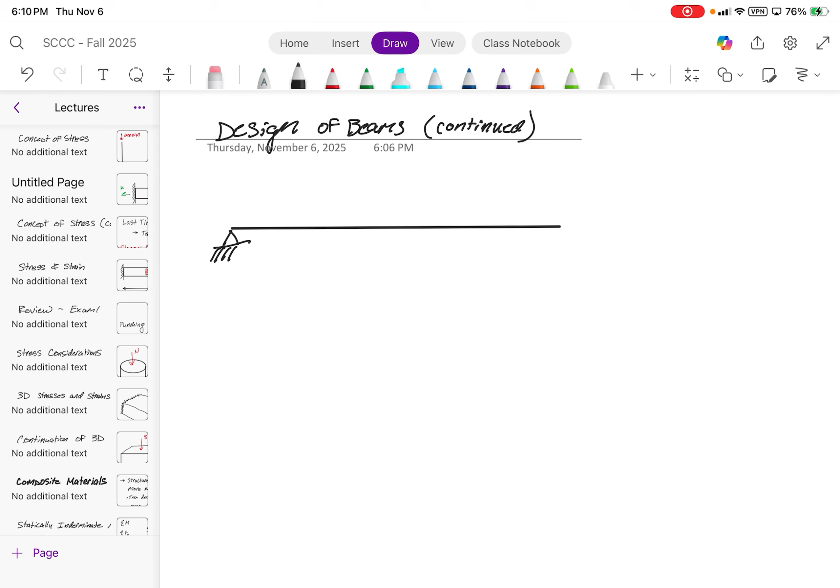All right, so we're just going to be doing more practice today of shear force and moment diagrams, and then also the design of beams, and then the analysis of beams.

So what I want to do is just give you guys a little sample here. Let's say that this is 3 feet and 8 feet. This is a - let's see, what's a good shape? A W8 by 58.

And so, A992 steel. So, using a factor of safety of 1.6 - no, 2.0, I want to use 2.

Determine if design is adequate. All right, so is it okay for flexure, because we haven't learned about shear yet, and I'll probably go into shear next class.

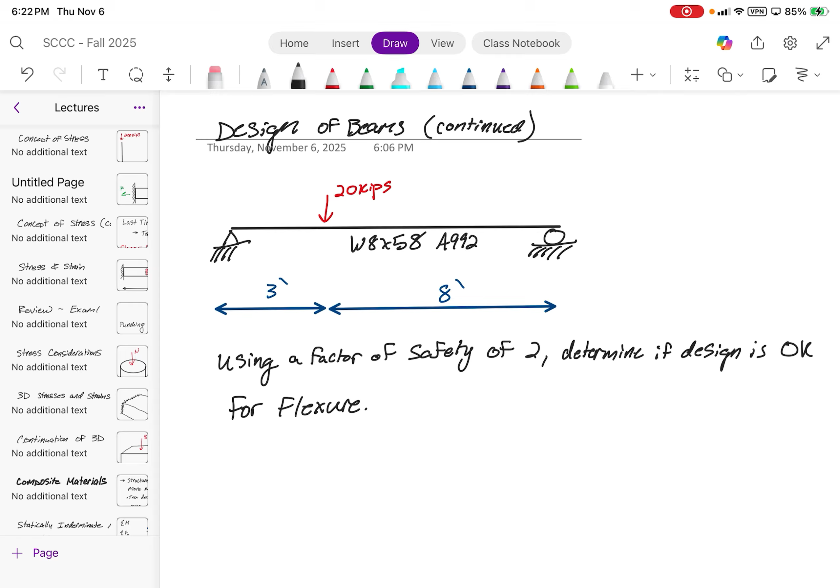What's your section modulus you're getting that you need? Here, let's work on it together. I was just messing around with some stuff on here, let me pull that back up real quick. All right, so...

Is the W shape adequate? I want to hear what you guys got. Still solving? Did you figure it out, you think you got it? I don't know if it's right, but I think yes. Edgar? Don't hope I got it. All right, Haza? No? Oh, this is bad. Your exam's in like 2 weeks, it's before Thanksgiving.

So let me ask you guys, what did you at least get for the bending moment? Did you draw it out? Shear force bending moment diagrams? Did you draw those out, or did you just use the equations from the tables? I don't know.

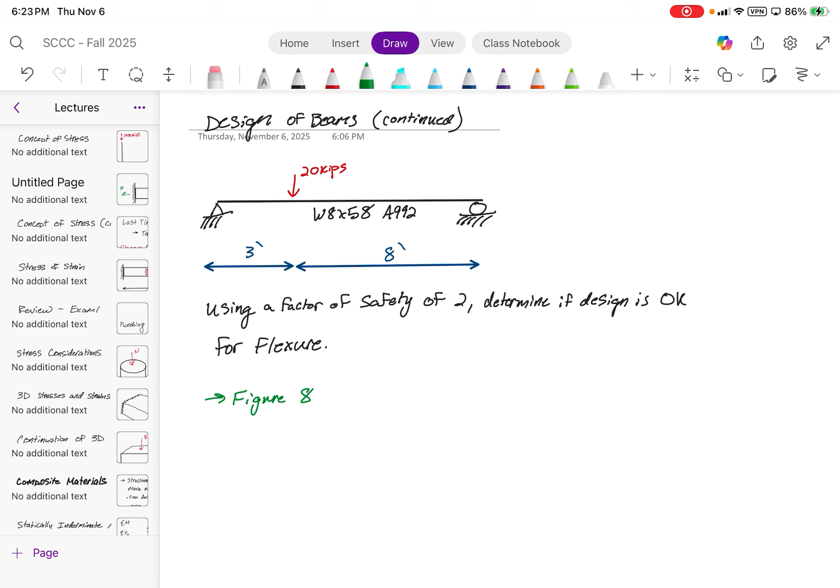Well, what you could have done is use Figure 8 here, because that gives you the bending moment for this load case. Within that table, A is going to equal 3 feet, B is going to equal 8 feet.

The length is just going to be 8 plus 3, so 11 feet. And so when you plug this in, you get M max is equal to the 20 kips times A times B divided by L, so 3 feet times 8 feet divided by 11 feet.

Now, what we should get for the bending moment is 43.64 kip feet. Is that what everyone got?

Now, we need to design our section for a factor of safety of 2. So what does that mean? Our design bending moment is just going to be M max times 2, so this gives us around 87.27 kip feet.

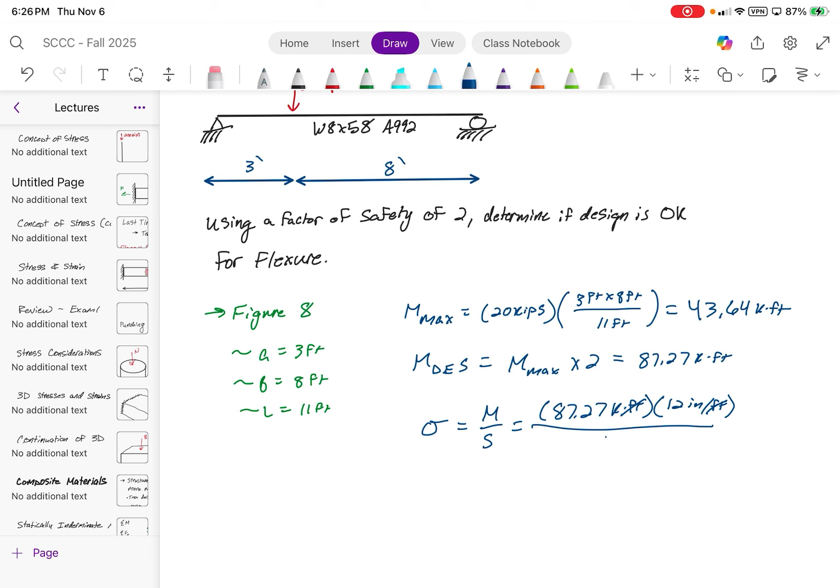And then what's the section modulus of a W8 by 58? Is it 52? Yes. Over 52 cubic inches, which gives us 20.14 KSI.

So is our design adequate? Well, what's the yield strength of steel, of A992 steel? It is 50 KSI. So because our applied stress is less than sigma y, what does that tell us? Good or bad? It's good, it passes. Great.

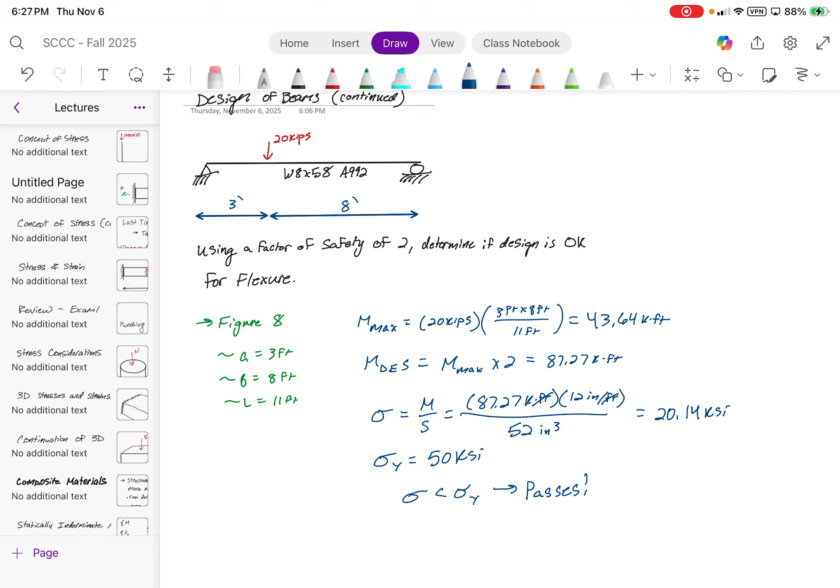Pretty straightforward, right? That's how you perform a design check. It's just really getting good at drawing these diagrams and using these tables, and then just remembering that equation, sigma is equal to M over S. Does that make sense to everyone?

Now, let's see, let's see here. Here we are. Now, there is one more topic that I really want to discuss in terms of beam flexure, and that is composite beams.

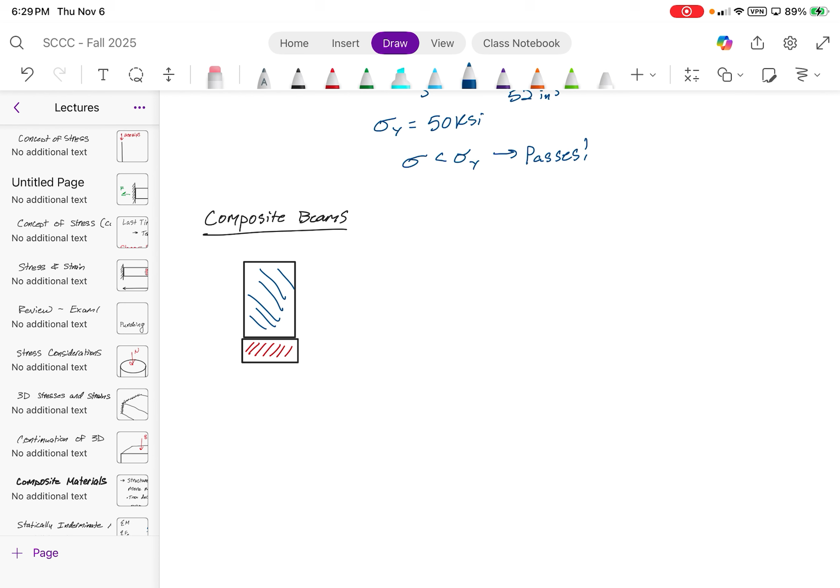Now, for composite beams, what do we know, what is a composite? Two or more materials, yeah. So this could be like a wood block with maybe some type of steel. So again, a composite is two or more materials.

Now, when we were learning about composites for axial loads, how did we relate the composite materials one to the other? They were both equal to one another? Well, that was compatibility, the strains are equal to each other. I'm not going to go into the derivation for that because it's kind of hectic.

I'm just going to show you guys an example problem for where that would be used. But what I do want to ask is, there was a material property we used to relate stiffness of one material to another. Do you guys remember Poisson's ratio? No, it's not Poisson's ratio. It's the modular ratio, the ratio of one material over another. You guys remember doing this?

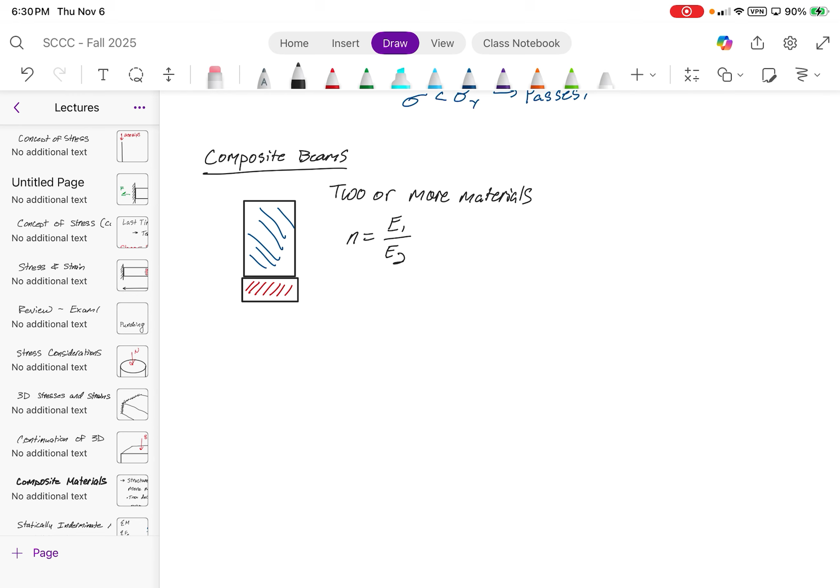Now, this becomes really important. So let's say that just for simplicity's sake, just to simplify the problem, let's give this problem some dimensions. Let's say that both of these elements are the same dimensions, right? I didn't exactly draw them as such, so let me fix that really quick. There. And let's assign 2 inches, 1 inch, and 4 inches.

Let's say this has an elastic modulus of around, I don't know, 1800 KSI. And then this had an elastic modulus of 29,000 KSI.

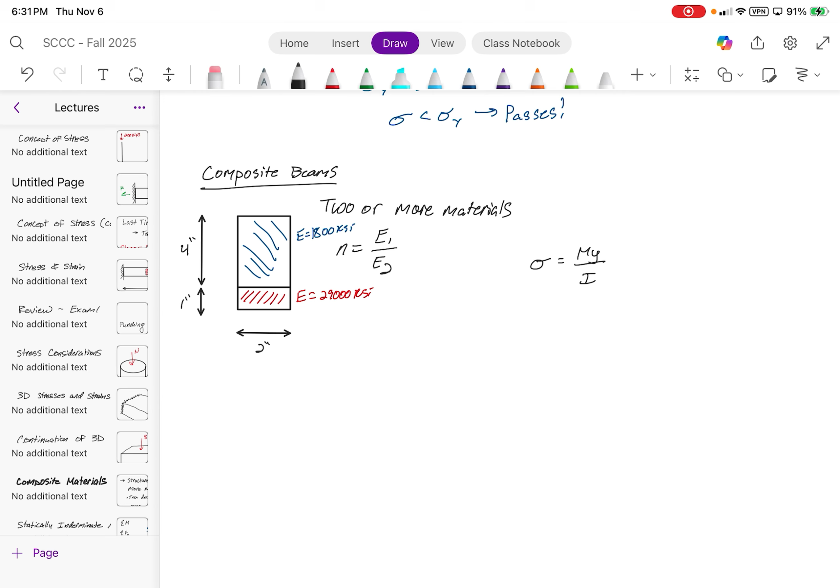So the way we would solve this is we still need to use our equation, sigma equals My over I. You need to use this equation because it's not symmetric. Remember, last class I said we can use the M over S equation for symmetric shapes only. Otherwise, you need to use My over I. This is one of those examples.

So what we need is I and Y. What is I? It's the second moment of area, or moment of inertia. So what you need to do is create that table, if you guys remember this.

That gives you the location of the neutral axis. And then you're going to have an IX, a dY, an A dY squared, and then an IX. Do you guys remember doing this in statics? You do? All right, that's good.

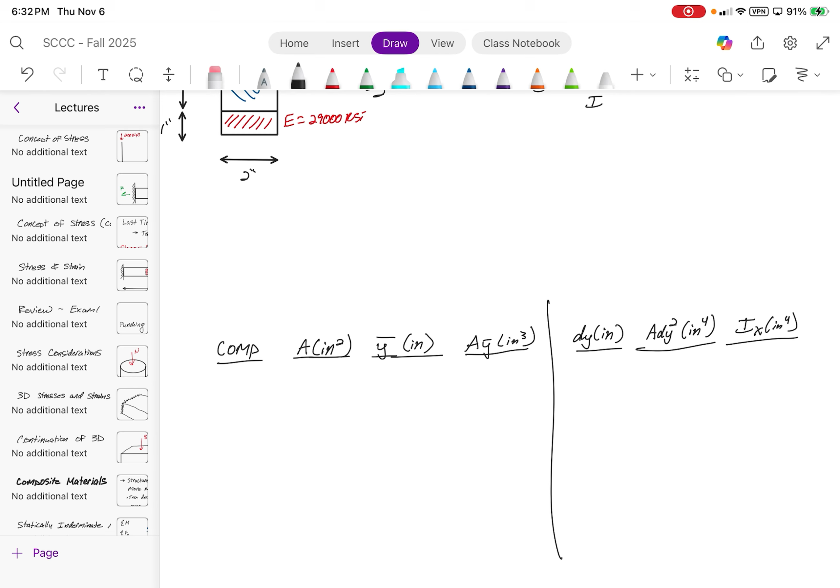Now, what are our two components? We're going to have component 1 and component 2, the blue and the red. However, one of the things that we need to do is make all of the materials, quote unquote, one equivalent material.

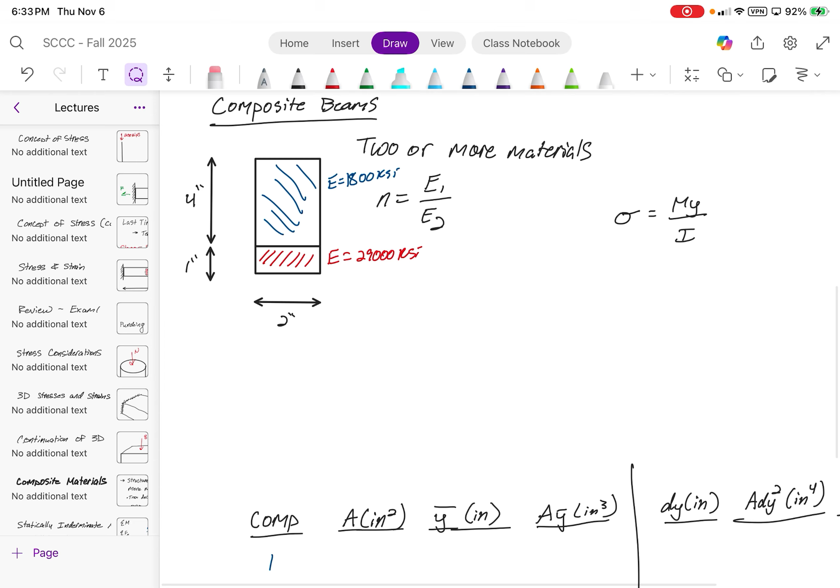The way that this is done is by taking our section here and finding a geometry that meets an equivalent stiffness. This can be done by simply transforming our stiff section into something more equivalent in geometry, such that it meets the same stiffness properties.

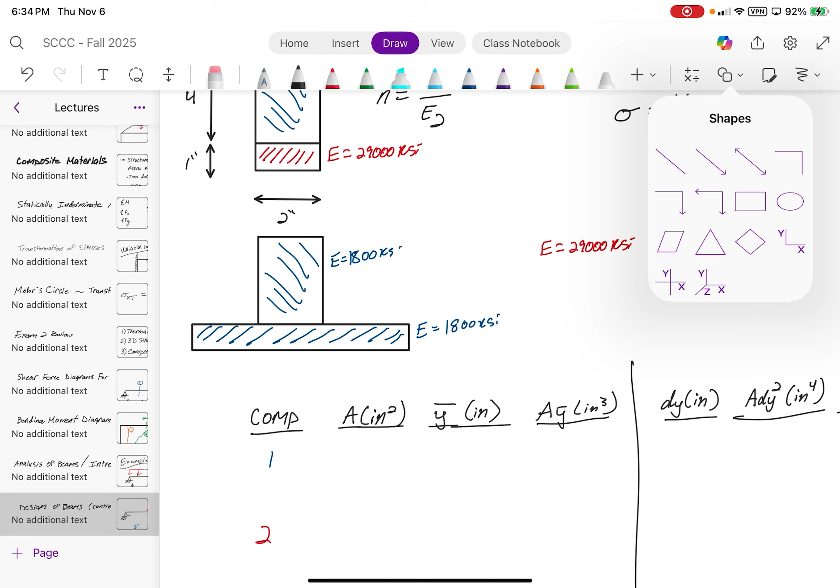What we can do is then change the width here, and this width that we change this geometry to is equal to that dimension that we initially had, which is just the 2 inches, and then we multiply it by this value n.

Now, in this case, E1 is going to equal 29,000 KSI, and E2 is going to equal 1,800 KSI. So 29,000 divided by 1,800 gives us a value of around 16.11, which means that this width is equal to 32.22 inches.

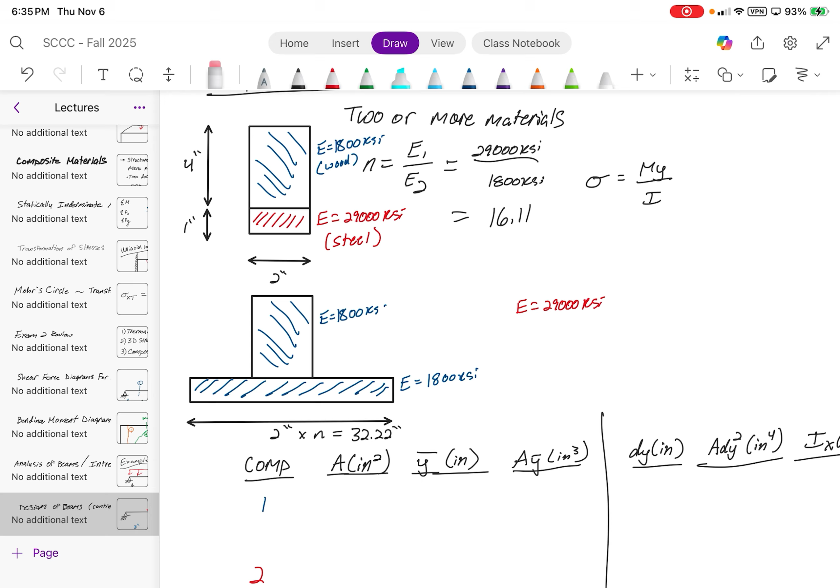It means that in order to meet the equivalency of this steel, you need about this much amount of whatever material it is - I think it's like wood, okay? Let's say it's wood. So the blue will say, whoops, I don't know why it just shot off like that, but this is wood, and then this is steel, and I'll actually clarify that down here.

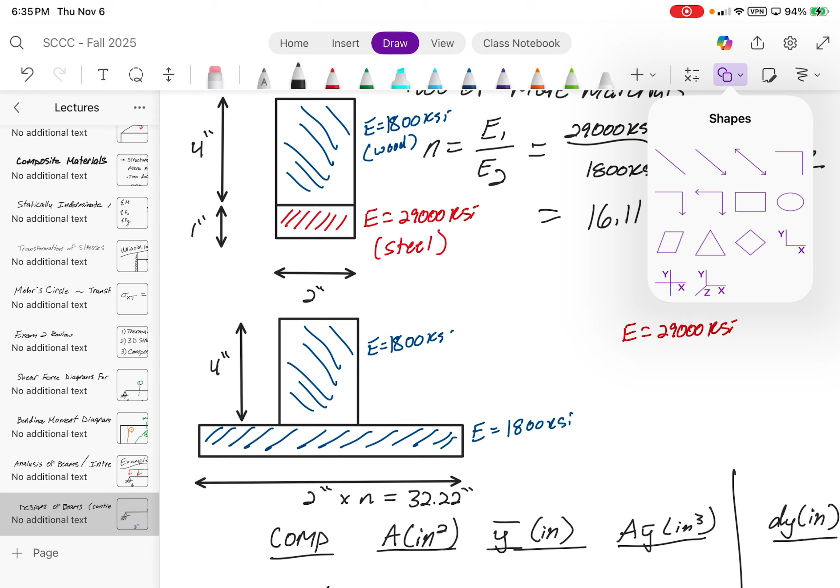So wood, and then steel, but we want to use the wood equivalent properties. Now, all we do from here is work this table using this updated geometry. And then the vertical dimensions here just remain constant, so that stays at 4 inches, and then this height stays at 1 inch.

Are there any questions so far about what's going on here? We're just relating one material stiffness to another and quote unquote transforming it, because the variation in the stiffnesses are going to cause variation in stresses. Does that make sense?

So the area of the wood for the top is just going to be 8 inches squared. And then for the steel equivalent for wood, it's just going to be 32.22 inches squared.

What we need now is the neutral axis locations. The neutral axis locations, if you guys remember, is just taken with respect to the bottom. So for the wood is going to be 1 plus 4 divided by 2, so 3 inches from the bottom. And then for the steel equivalent wood is going to be half an inch.

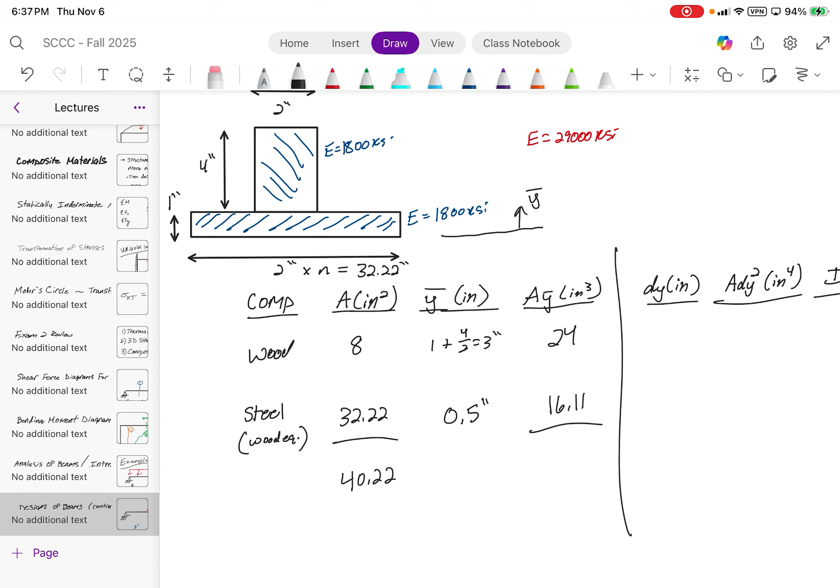Lastly, just multiply across, you get 24. And then 32.22 times 0.5 is 16.11. And so you just sum everything together. This becomes 40.22, and this becomes 40.11, which means that our y bar is equal to about - ironically, it's equal to roughly an inch. It's very close - it's like 0.998 inches, but I'm just going to say it's 1 inch.

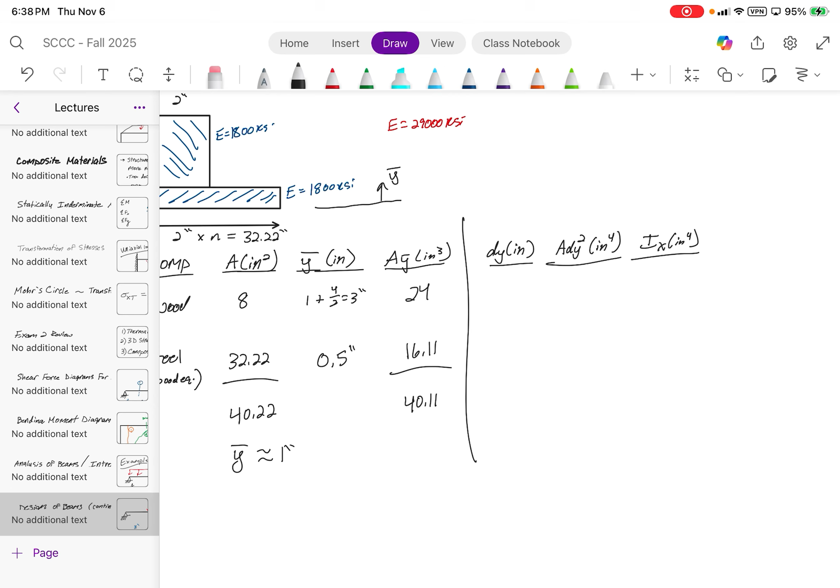From here, you do dY. dY is the distance from the neutral axis, which is just going to equal y bar minus y bar - we'll call this y bar t, so that's going to be this - and you're just taking an absolute value of it. So for the wood, it's just going to be 1 minus 3, so this becomes 2 inches. And then 0.5 minus 1 inch is just 0.5 inches.

32.22 times 0.5 squared gives us 8.06. And then 8 times 2 squared gives us 32 inches to the fourth.

And then Ix we calculate using the known value bh cubed over 12, which for the wood would be 2 times 4 cubed divided by 12, which gives us 10.67. And then 32.22 times 1 cubed divided by 12 gives us 2.69.

So this is 40.06, and then 10.67 plus 2.69 is 13.36, which means that our total second moment of area of inertia is equal to 53.42 inches to the fourth.

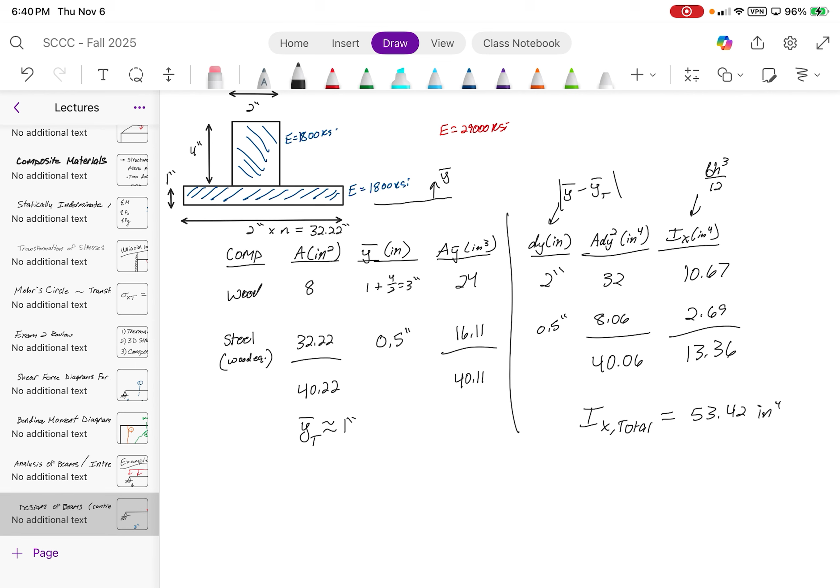We're not done with the problem yet. Let's say that this beam, we do our analysis, and we have a design force of M equal to, I don't know, 40 kip feet.

If we want to determine the stresses at the top and at the bottom, we need to use the My over I equation. So 40 kip feet is the load times 12 inches per foot to convert it from kip feet to kip inches.

Y is the location from the neutral axis. So let me grab this diagram again.

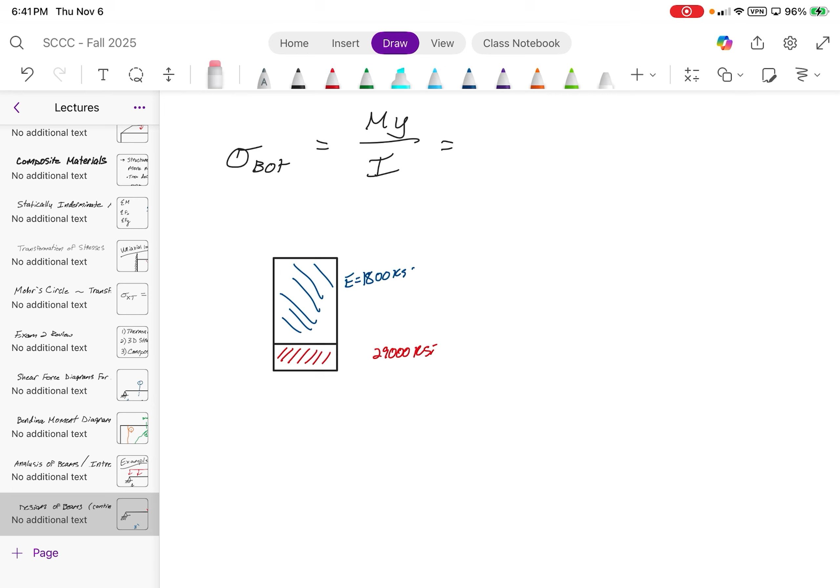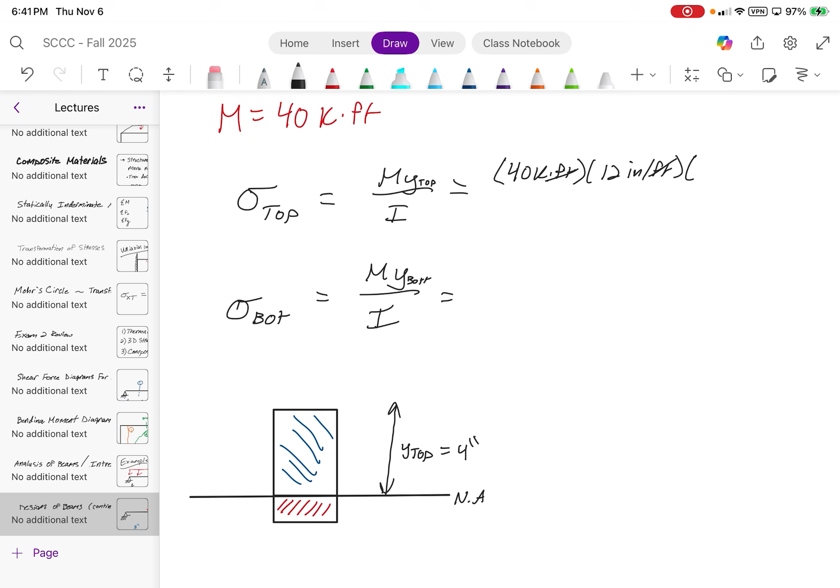So our neutral axis was roughly around here. Y bar to the top, that would be just this value, conveniently 4 inches. And then y bottom was equal to 1 inch. The neutral axis isn't always at the location of transition.

If, for example, you had two materials like this, you could technically have a neutral axis here, in which case this would be y bottom, and this here would be y top. But for this problem, it just happened that it's pretty close to the transition point, okay?

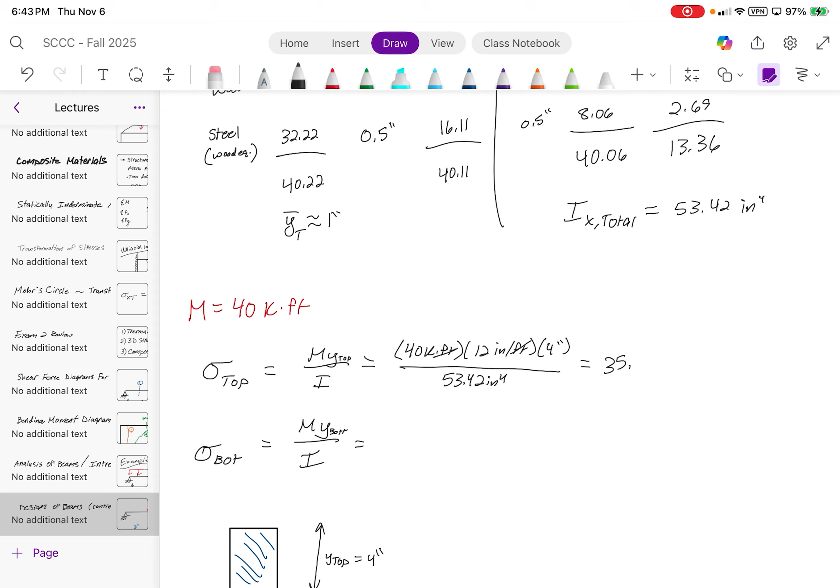So y top is equal to 4 inches. And then we just divide this whole thing by 53.42 inches to the fourth. And what we get is 35.94 KSI. For wood, this is a very high stress, so clearly you would want to redesign it.

Now for the steel, you do the same thing, but it's a different material. So for the transformed material, the steel, you need to multiply this stress by N.

This gives you a stress of around 144.75 KSI. I chose a really horrible bending moment for the checks, but you guys can kind of see what we have to do. Does this ring a bell to some people with the second moment areas of inertia and so on? Or not at all?

Okay, that's just how composites work. I might not give you a full-fledged problem on an exam. What I might do is ask you guys to find the equivalent transformed section, which then would be just this entire thing in one problem.

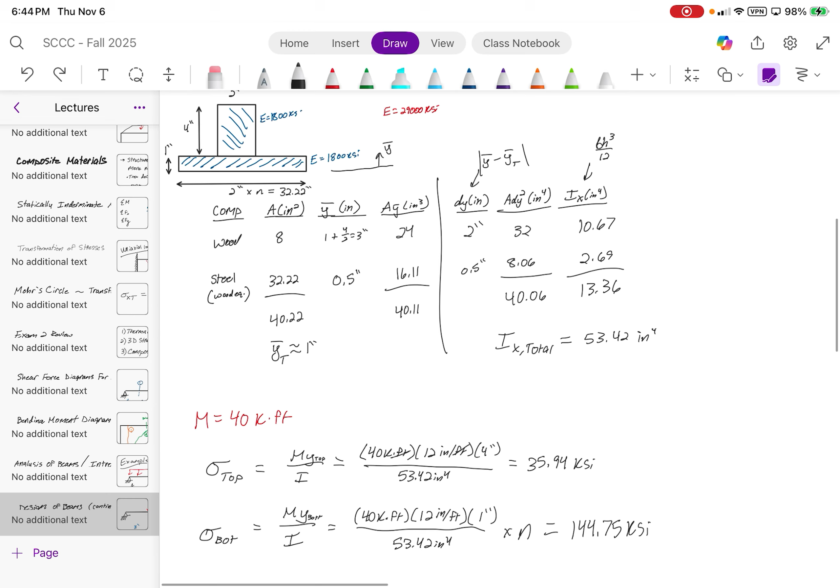Or I might give you guys the material properties, including the transformed section modulus with a cross section. So I'd give you IX and the location of the neutral axis, and I would just ask you guys to find the stresses. So it would be either this up here as one problem or this down here as one problem. But I won't give you guys both sections in one problem because it takes too long.

We just spent 15 minutes doing it. If that's on there, would you give us a table or should we write it down on a flashcard? I would recommend you guys write it on a flashcard. It's because you don't technically need a table to do this, but I would recommend you guys know how to write it.

I preferably don't put it on the flashcard, just remember how to do it. And actually, just as practice, I'm going to give you guys an example, and I want you guys to do this. Instead of it being a composite section, don't transform anything. This is all one material.

So this is 1 inch, 1 inch. This is 4 inches. And this is 4 inches. I want you guys to find the second moment area of inertia about the XX axis.

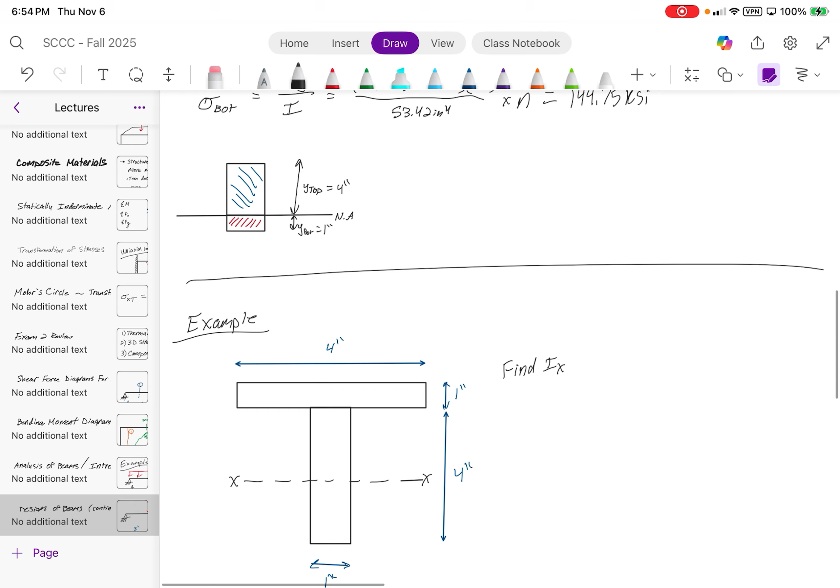Figured it out? Okay, all right. Somebody's got it, so let's go over it. Don't mind this, I'm just trying to plan for the next upcoming classes. Shake this around a bit.

All right, so what you do, you make your table: A, Y bar, A, Y bar. Your area is going to be in inches squared, inches, and inches cubed. And what you need is two components, your flange and your web.

What was the area of the flange? Which one is the flange for you? That's the top part, right? Yeah, the flange is always the top, the web is always the centerpiece. So the area for that would be 4 inches squared, and the same thing for the bottom.

All right, what about Y bar? 4.5 for one, 4.5 for the flange, and 2 for the web. And then a Y bar for each: 18 and 8. You sum these, you get 8 and 18, 26. So what did you get for your neutral axis location?

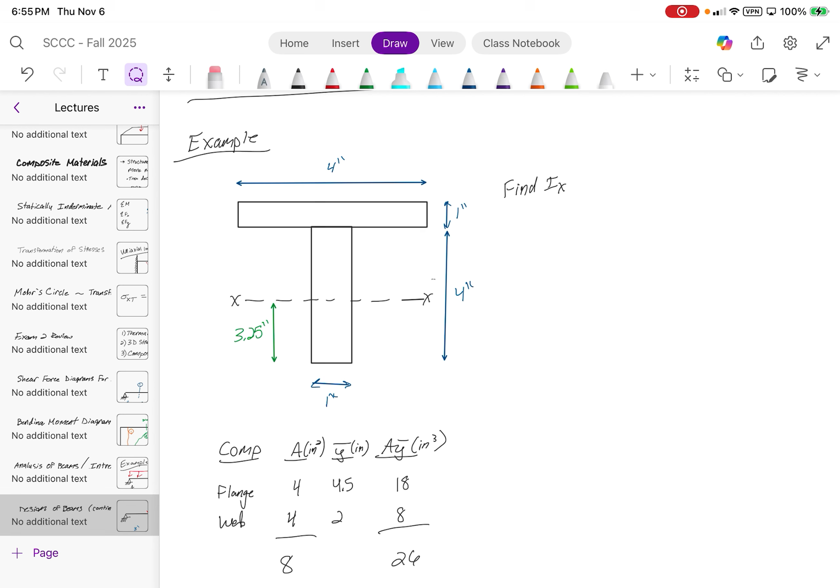3.25. All right, what that means is 3.25 inches from the bottom is our neutral axis. It probably looks closer to like something like this, I want to say. Maybe this. Whoops, I accidentally grabbed that on accident.

Good, now you've got dy in inches, a dy squared in inches to the fourth, and then Ix in inches to the fourth. What'd you get for dy for each of those? Or you didn't get up to it yet? Oh no, I did, I just messed up my Y bar.

I did 4 times 4, I meant to put 4 plus 4. It was just an easy fix though, so I think it should be 1.25 for the dy. I'm pretty sure it's for both of them. And so then 4 times 1.25 squared gives us 6.25 for both.

And then for the top flange, it's going to be 4 times 1 cubed divided by 12, so basically 0.33. And then 1 times 4 cubed divided by 12, which is going to be 5.33. You add these together, you get 12.5 and 5.67, which means that your total Ix, you should have gotten 18.17 inches to the fourth.

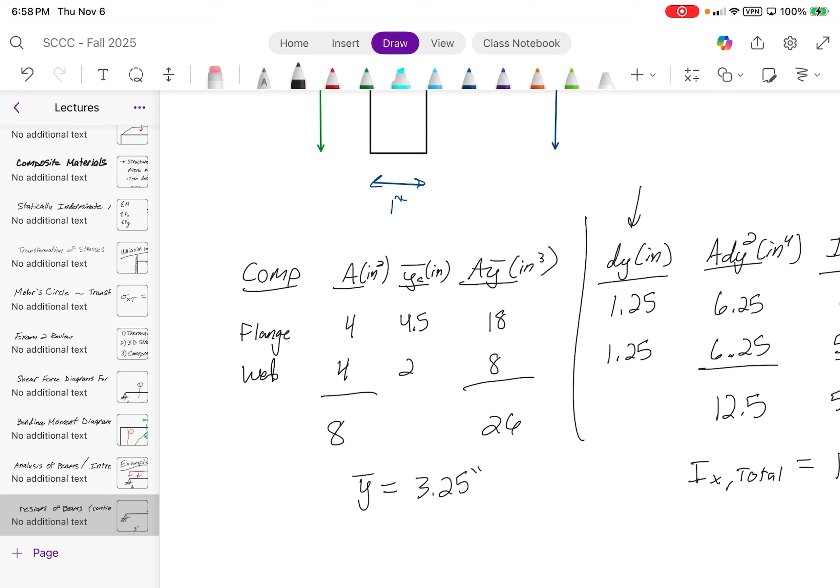Quick question, to get that Y bar, you divide 26 by 8, you get 3.25, and then once you have that, what the dy, dy, you can... I'm going to call this y subscript i representing each component, actually the y bar of each component, so yc. The dy is just going to be that y bar minus yc, but just take the absolute value because it ends up getting squared anyways, so it doesn't even matter the sign. Because you notice in dy squared, the square is going to cancel out the negative. Oh man, so just take the absolute value, it doesn't matter.

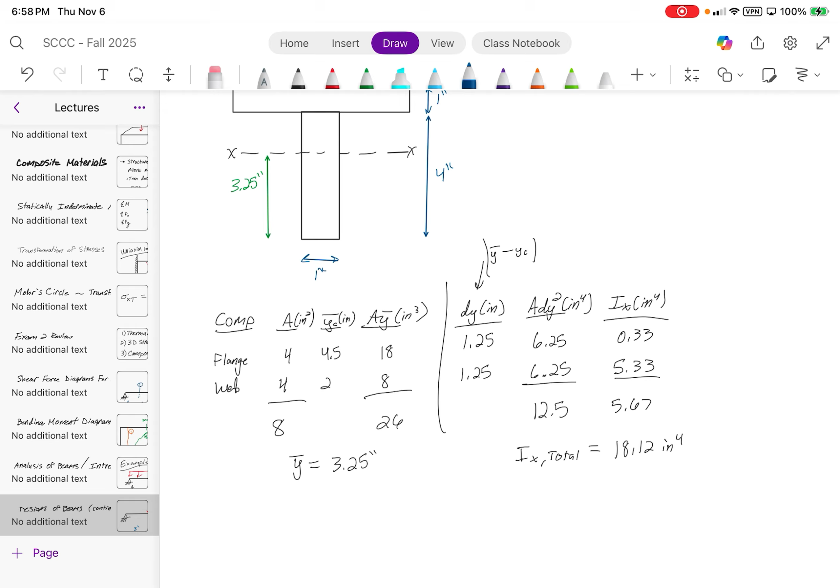All right, so you've got Ix total. Now let's say that you have a beam and you do your bending moment diagram, your analysis, and you get that your bending moment is equal to, let's say, 15 kip feet. What? Actually, nope, I'm going to change that.

Let's say that this steel is A36 steel. What's the yield strength of A36 steel? 36 KSI, all right. So knowing this, what is the maximum permissible bending moment that this section can handle? Take a few minutes to figure that out, and once you guys figure it out, we'll take our break. Or I'll go over it then, we'll take our break.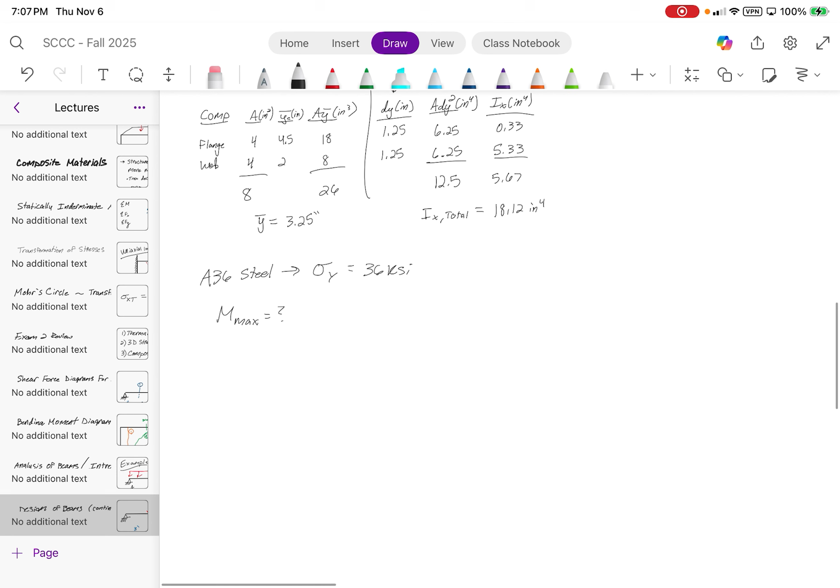All right, let's unfreeze this. I gotta shake my screen just to turn it back on. All right, so...

M max is equal to question mark. How do we do this? We gotta recall our equation for stress, however we write it in terms of sigma equals My over I. Now, because we don't have a singular section modulus, you keep the equation in this form.

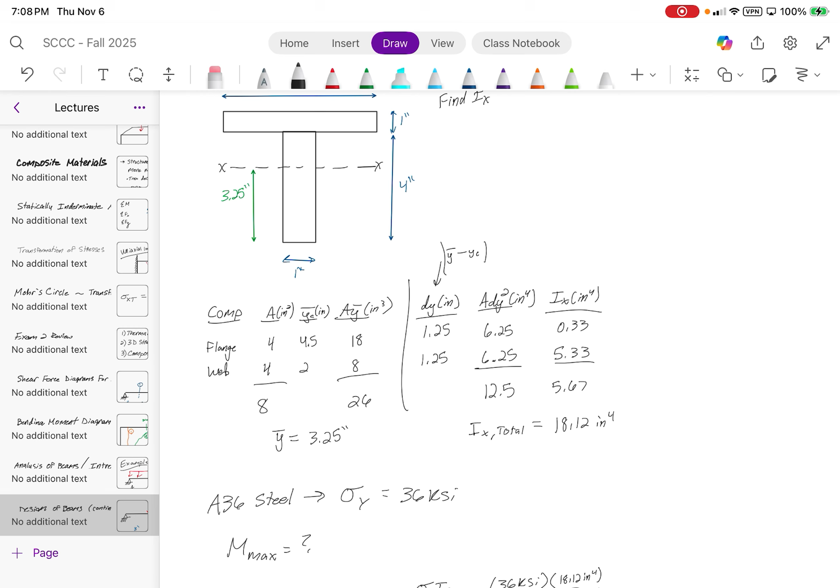So from here, you plug in 36 KSI times I, which is 18.12 inches to the fourth. But then the trick becomes, what do you use for y? I used the 1 inch for the replacement. Well, it wouldn't be 1 inch.

So there are two possibilities we can have for y. We can have y top, which what is that going to equal? And then we can have y bottom, which is equal to that. Can somebody tell me what those are equal to? Is that y bar? Well, y bottom is y bar, yeah, so 3.25 inches, which means y top is going to be 5 minus that.

So 1.75 inches. So to find the maximum capacity that this section can handle, which value would you guys use, 3.25 inches or 1.75 inches? 3.25, why? Because it's the furthest away. It is, you would use...

3.25 inches. The reason for that is because when you are drawing your stress-strain curves, your stresses will look kind of like this, which means the bottom is going to yield first. Otherwise, what happens is if you set the top equal to yielding, your stress diagram ends up looking closer to something like this. Which is incorrect. The reason being is because all of this also ends up yielding.

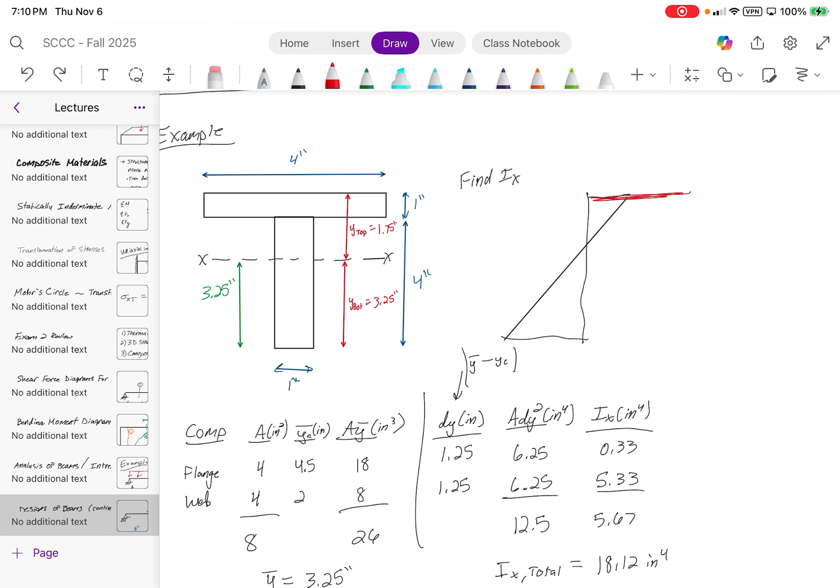Do we want that? Depends on the material, but generally no. For steel, you would assume full yielding. I'm not going to get into that at all because that's an entire nightmare in itself. Well, not that it's a nightmare, but I'm trying to keep things related to this class. So because of that, the y should be chosen such that it creates the minimum value.

So by using this larger value, it's going to reduce the maximum capacity of the bending moment. So yeah, you're right, Oscar, for that reason alone that it's further away. So 36 times 18.12 divided by 3.25 means the maximum bending moment we can have is 200.71 kip inches, which when you divide by 12, you get 16.73 kip feet.

Which means that no matter what type of load you have applied for that beam, it cannot exceed a bending moment of 16.73 kip feet. Any questions? No? All right, let's reconvene in about another 5 minutes, and then I'm going to go into shear stress, just to show you guys how that works.

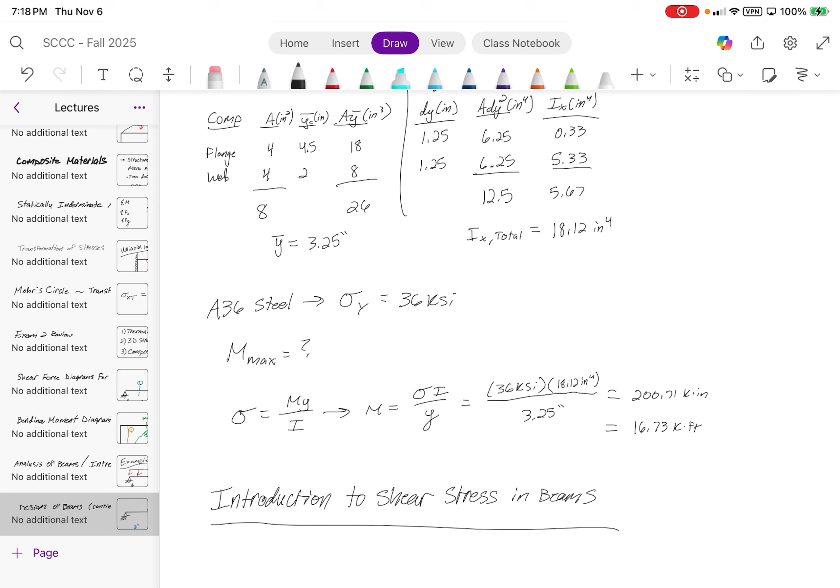All right, so introduction to shear stresses. Shear stresses are another type of stress that you need to consider in the design of your beams.

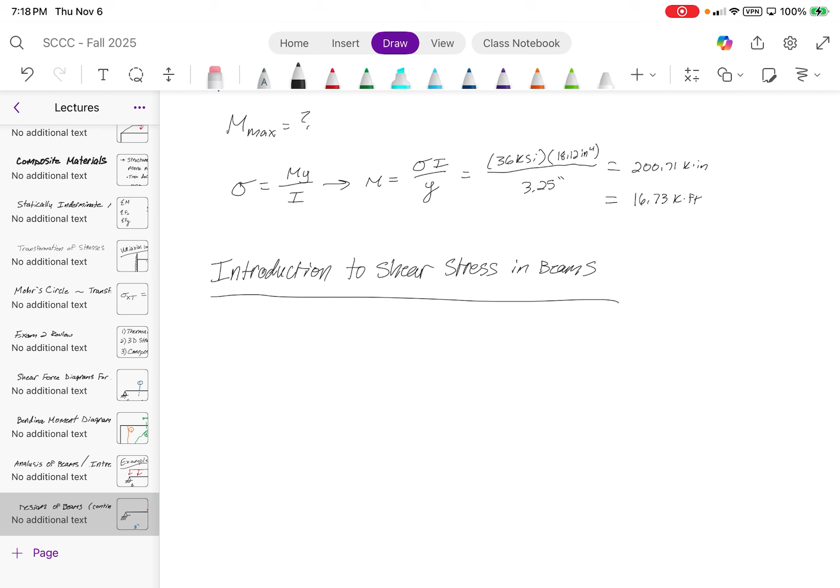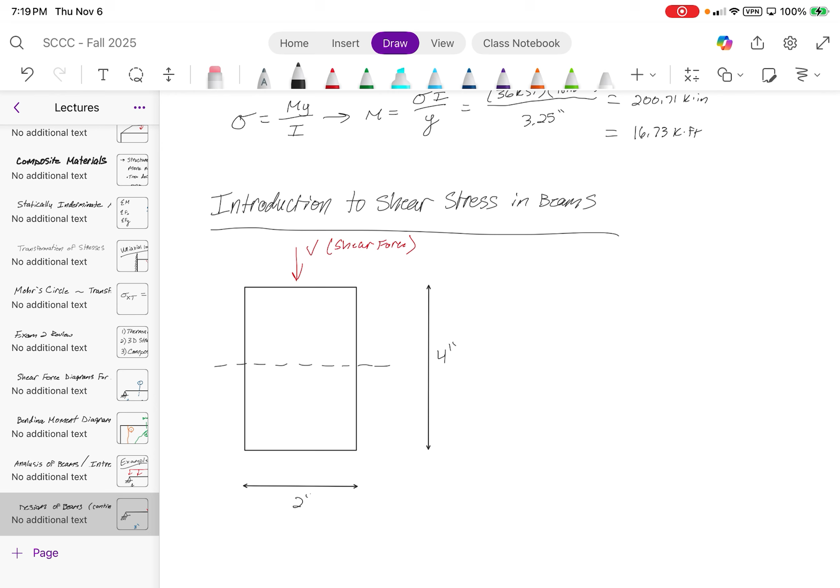Let's consider a rectangular cross section subjected to some type of shear force, V. So that's our shear force. And let's say that this has dimensions of 4 inches and 2 inches.

Now, if this shear force was equal to, let's say, 5 kips, what would be the conventional way of calculating stress in a beam for shear, for anything, not necessarily a beam? What do you guys remember about our shear stress equation from the beginning of semester? V over A. Exactly, V over A.

So 5 kips divided by 4 times 2, which would be 8 inches squared, which would just be 0.63 KSI.

However, in reality, a lot of times when we are designing with shear in beams, we need to consider that there's actually some variation within the cross-section of the beam's shear.

So how will this look? This shear force is actually going to be quadratic, where it's maximum at the neutral axis.

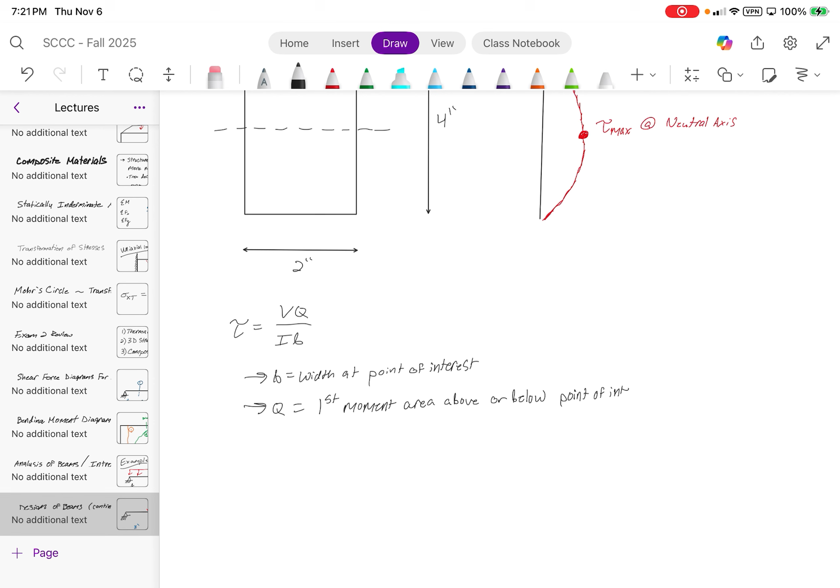So what do we mean by this? What is this Q value? Well, when we develop this, Q is equal to these new terms called A tilde times Y tilde, which are the area above or below the point of interest and its location with respect to the neutral axis.

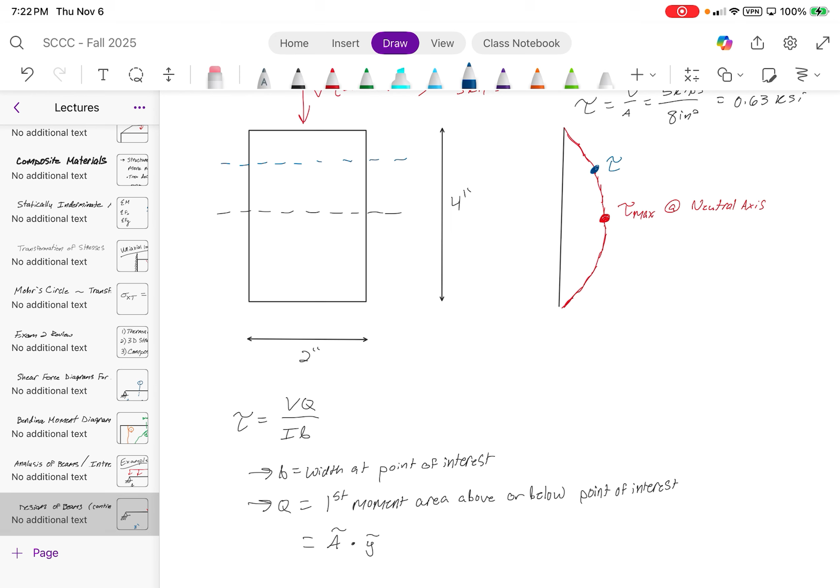So let's say that we wanted to find the shear stress here, tau. That's where our point of interest is. Let me not stop recording on accident, go back to this. I'm just going to call it tau I. Tau I is our shear stress at the point of interest.

This A tilde is going to equal the area above the point of interest. What is Y tilde? Y tilde is the location of the center of this area with respect to the neutral axis.

This is basically the same as if you did the components, you have the A, and then you've got the Y, and then the AY bar. The Q is basically just this value, right? You're just doing it for a very particular location.

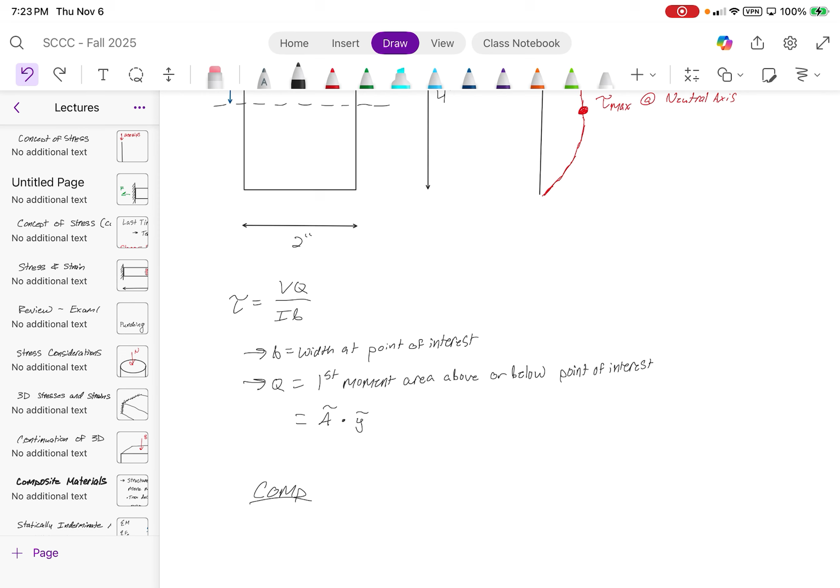So let's say that we were interested in the shear stress at a distance, I don't know, Y, 2 inches away from the neutral axis. All right?

So what we would need to do is, we know what our shear force is. We said our shear force was 5 kips. What is the width of the section at this location here? Yeah, it's just 2 inches.

It gets a little more complicated once you start having like W shapes, because then the width varies. But the equation would just follow the same exact procedure. It's just a matter of understanding that width B. That's the trick with these problems. So you have B, which is equal to 2 inches in this case.

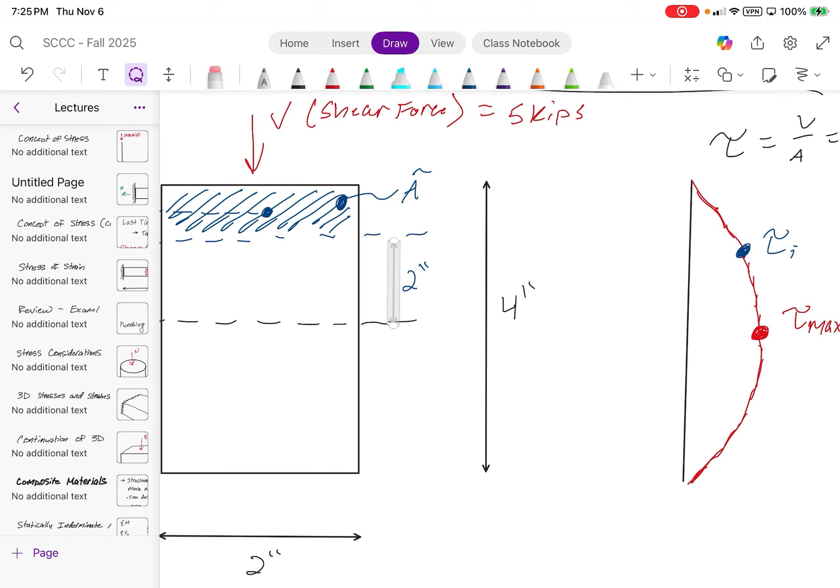But then what is the area, this A tilde here? What would that be equal to? First we need to know where this neutral axis is.

Oh, well, I just realized this doesn't geometrically work. Let's make that 6 inches, so just change that from 4 to 6. That way this is located 3 inches away, which in turn would make this equal to 12 inches squared, which 5 divided by 12 is just 0.42.

Sorry about that. So, what is the area above this location here? Well, what we need firstly is the height. The height of this location is going to equal what? Do you know? 1 inch.

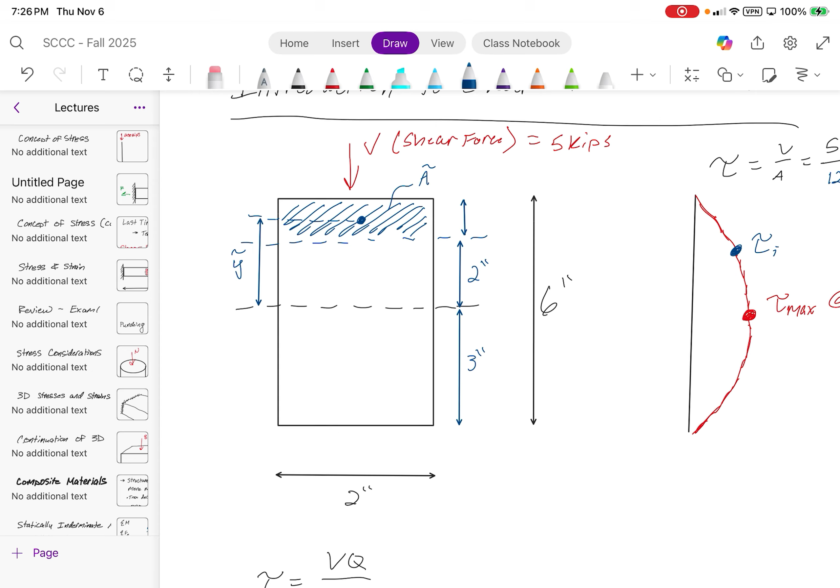So the total area, A tilde in this case, would be what? 1 inch times 2 inches, right? So it's 2 square inches. Now, where's the location of the center of that area?

It's just 2.5 inches. Does everyone see how it's 2.5 inches? You go 2 inches up, and then it's halfway up the 1 inch dimension, so 2.5 inches. Which means that our first moment of area is going to be 2 times 2.5, which is just 5 inches cubed.

Now, we need I, which is just going to equal B times H cubed over 12. So we've got 2 times 6 cubed over 12, which gives us 36 inches to the 4th.

So now we have everything we need. We just throw in our shear stress. We get tau, not tau max, but tau at this location is going to equal 5 kips times 5 cubic inches divided by 36 inches to the 4th, divided by 2 inches, which gives us 0.347 KSI.

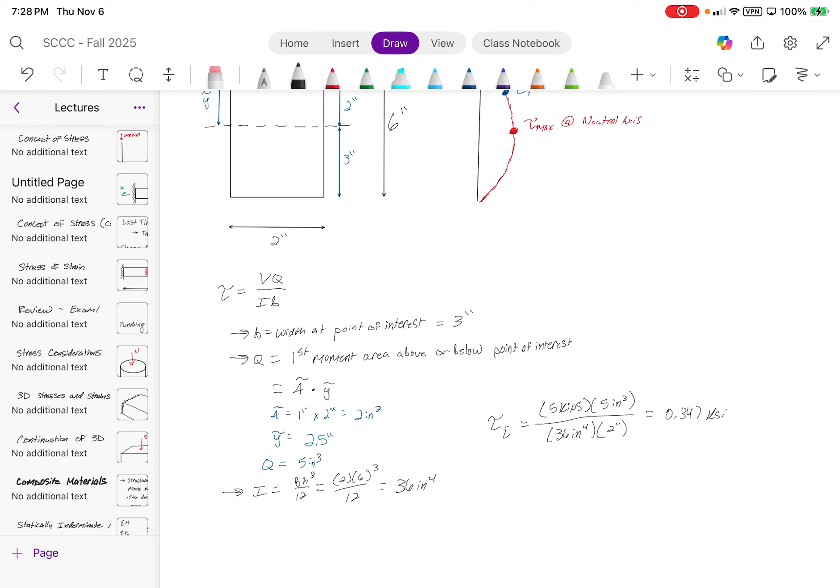Now, what if we wanted to find the maximum shear stress within the section? Because that's what we really want to design for. Well, in that case, for tau max, that would be our area, right? Because then our location of interest is at the neutral axis, and then we just need the center of this location.

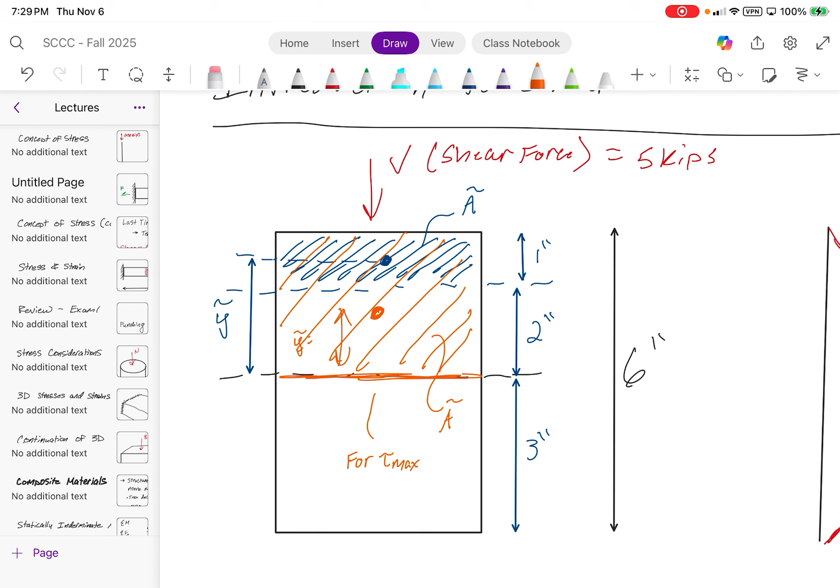So, in this case, B would still be 2 inches because we're dealing with uniform thickness, right? Q would just equal half the area times a quarter of the height, because this value here, y tilde, what would that value be? It would just be 1.5 inches, right? So the Q would just be, let me break it down actually.

We have A tilde, which is just going to equal the 2 inch width times 3 inches, which gives us 6 square inches. The Y tilde is the distance from the neutral axis, which in this case is going to be 3 inches divided by 2, so 1.5 inches. And so Q is just equal to 6 times 1.5, which is 9 cubic inches.

I remains the same. The only thing that's changed is the Q. So we can calculate our tau max, which is equal to 5 kips times 9 cubic inches divided by 36 inches to the 4th times 2 inches, which you'll notice is equal to 0.625 KSI.

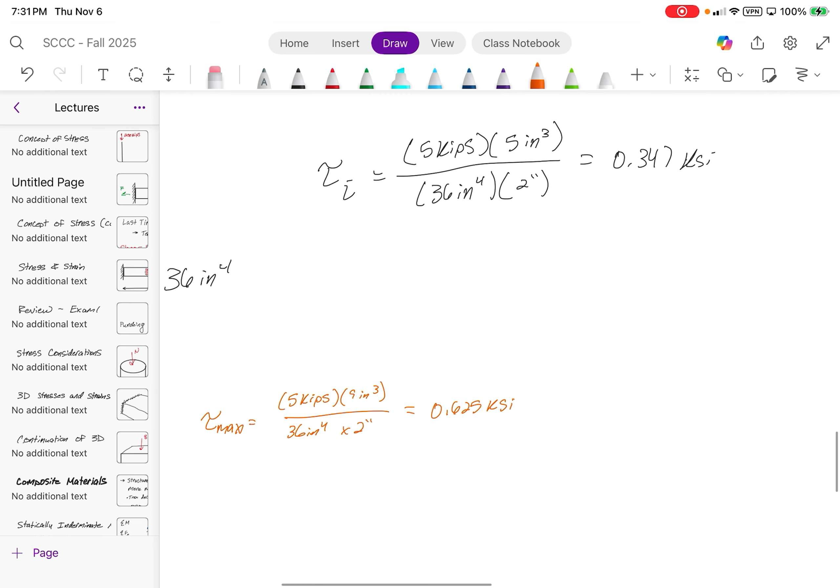Why is this important? Because the 0.625 is greater than the 0.42 KSI that we calculated above. We call this the maximum shear stress, and this is the average shear stress.

Any questions about anything I did here? Is everyone following along, or did I go a little too fast? Don't be afraid to speak out. No one? All right.

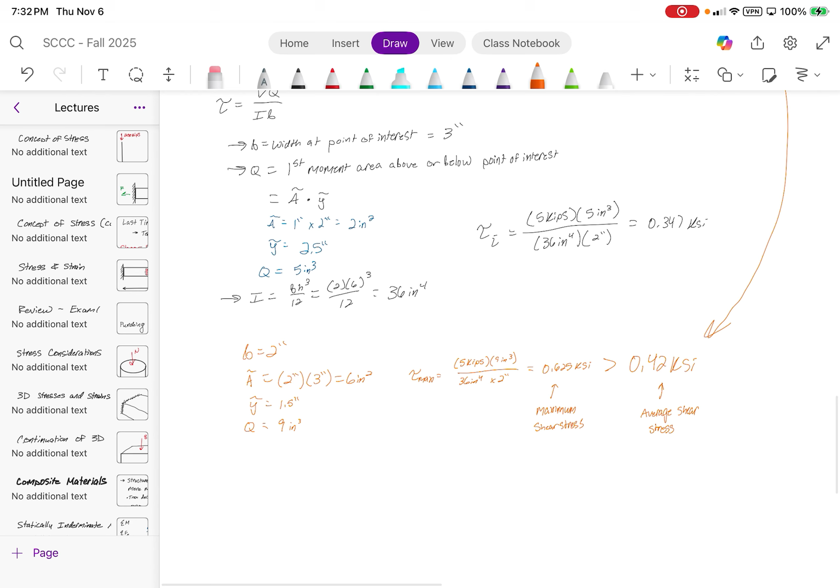So that's just an important thing to note, because for concrete or for wood design, you want to use the maximum shear stress that you can get, because otherwise your section can potentially fail.

Quick question: what we figured out for tau at that location, why would we have to know that instead of just doing the tau max? It's not exactly to just know it. It's to be able to understand how the shear stress varies. So at certain points, the shear stress is going to be less than the average shear stress, and at other points, greater. It's just to show you that the shear stress in a section actually varies with respect to the height, which when you're designing for beams, a lot of cases, you usually want to consider the maximum shear stress.

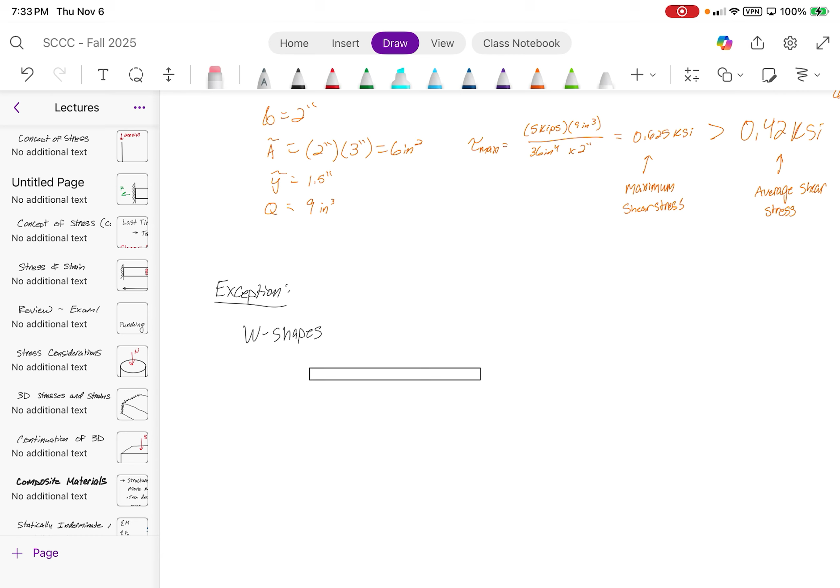Now, there are certain exceptions. For example, an exception to this rule is actually for W shapes or steel sections. So for W shapes, let's say we've got like this section right here.

All right, so why is there an exception? Granted, if you were to draw out the shear stress distribution, you're not going to get something as curved like this. Instead, what you're going to get is something a little bit more stepped, like this.

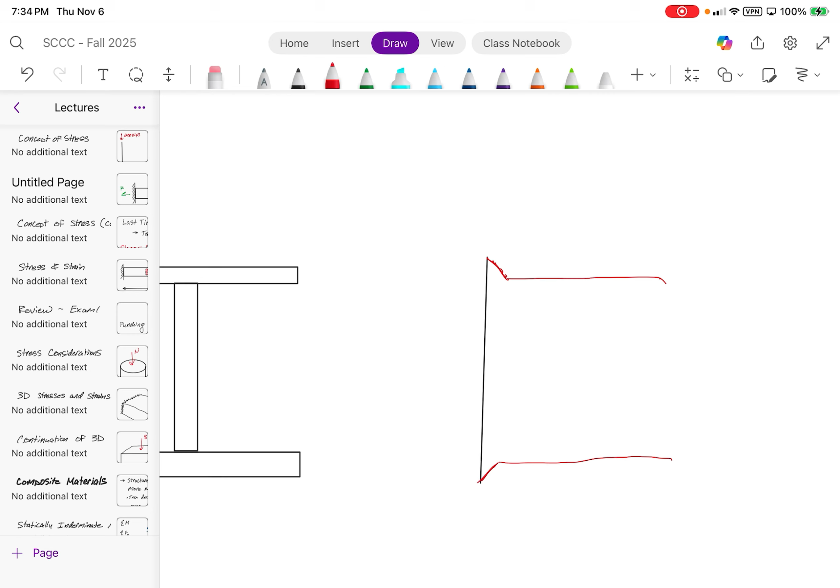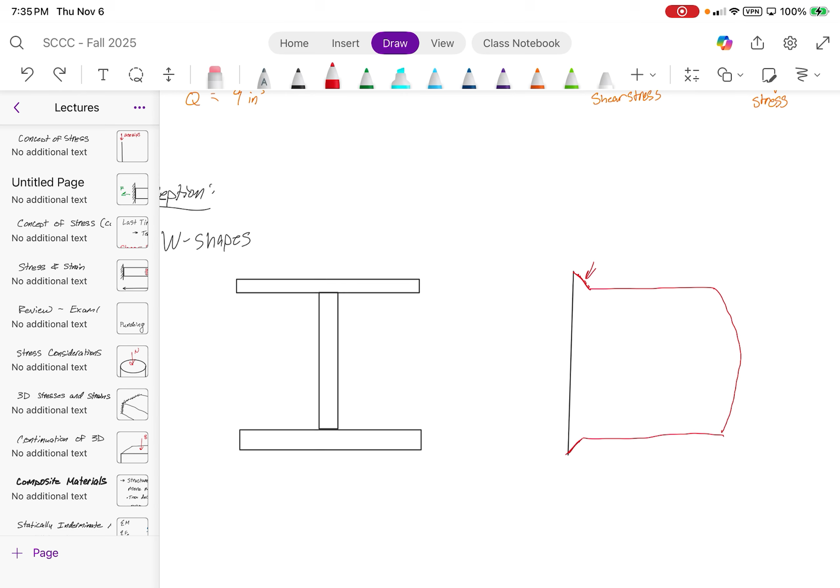And the reason has to do with that width B. Remember when I said in this equation that width B here? You would follow the same exact procedure that we had just done here, but when it comes to this, the B is going to be the width of your flange. So because of that, the shear stresses are significantly reduced. Does that make sense? Now, because of this, this is the true shear stress distribution.

Where we'll have a tau max here. So what does this tell us? It tells us that the web is the one that's carrying most of the shear. So the flanges are what carry most of the bending capacity, and then the web carries most of the shear.

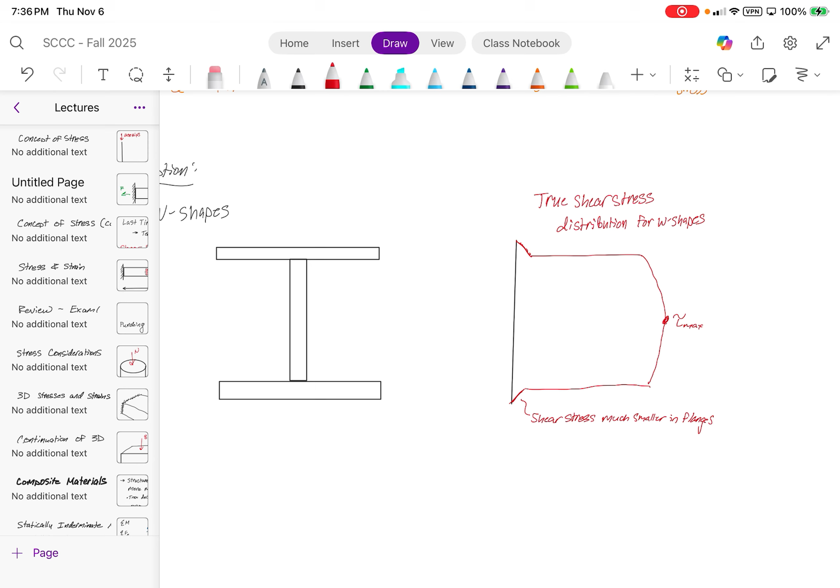Does that make sense? Because of this, with W shapes, when you are designing them, you don't use the entire cross-section. Instead, you use a simplified method where you just take the area of this web here, and we call this the average web shear approach.

So instead of doing this massive amount of calculations, what would the area subjected to shear be equal to? What is the height of this cross section? Let's say, I'm just going to pick something random, this is a W12 by 96.

What would this height D equal to? Oh wait, is it that? No, sorry, ignore that, I got to fix this. It's literally called average web shear approach for a reason. Just use the web shear area. There we go, it's that.

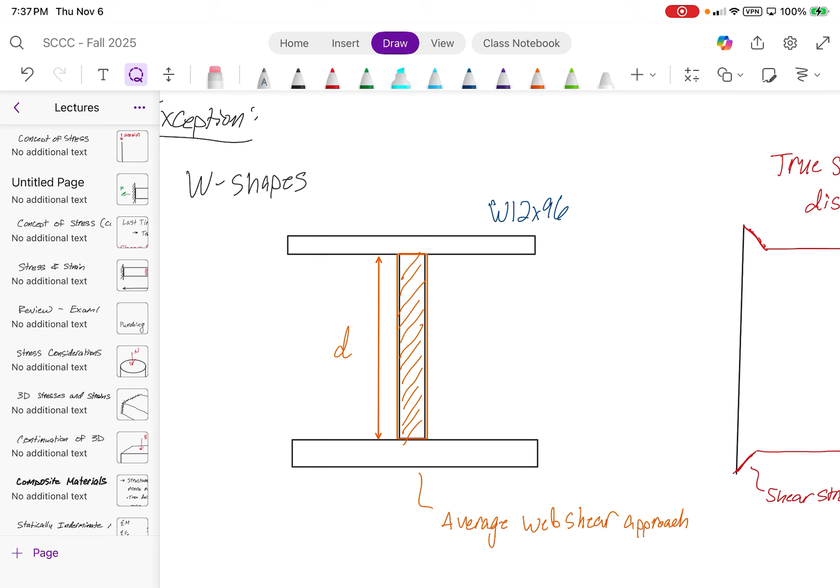I'm going to call that dV. What would the height of that section be? Which is the depth minus the thickness of the flanges. Exactly, so it would be dV is equal to D minus 2TF.

Where the depth for the W12 by 96 is 12.7 inches minus 2 flange thicknesses, so 2 times 0.9 inches, which is equal to 12.7 minus 2 times 0.9, which gives us 10.9 inches squared. Then to find the average web shear, it would just be the 10.9 inches squared times the web thickness, which is 0.55 inches. So roughly 6 square inches.

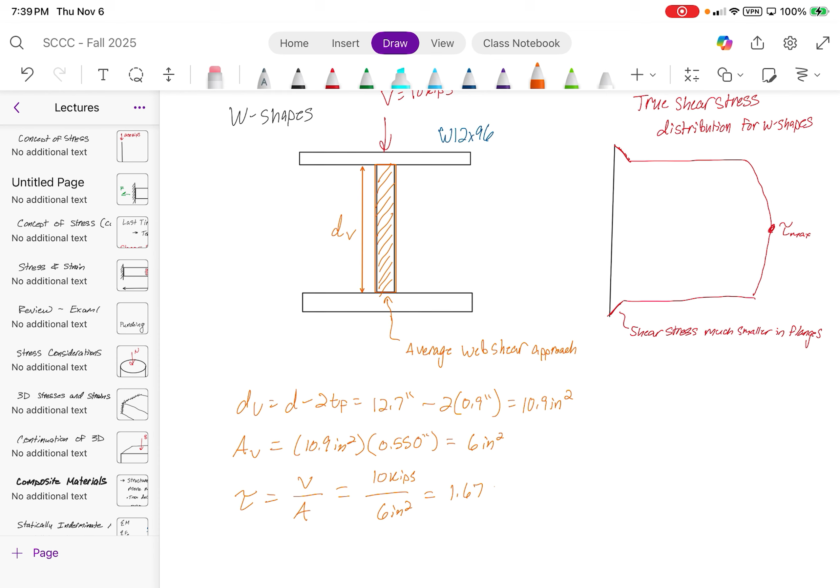So to find the shear stress, instead of doing that entire process of VQ over IB, codes generally allow you just to use V over A. So if you had a shear force, V is equal to 10 kips, then this shear stress would just be 10 kips divided by 6 square inches, which would give you a shear stress of around 1.67 KSI. Any questions about this?

So really, to go back to this problem here, you might be wondering, why do we use the maximum shear stress here? Well, the reason that we can use the average web shear approach for steel is because of that steel curve. If you remember, steel will yield, which in turn allows you to be able to use more strength, because it plateaus. You remember when we went over material properties, you had the stress strain curve.

This would have been like the sigma normal stress and epsilon. Steel kind of looks like that, and it's very similar for shear. Well, materials unlike steel don't have that luxury of additional strength after they yield. They'll just fail, which is why you need to design for that maximum shear stress versus the average shear stress.

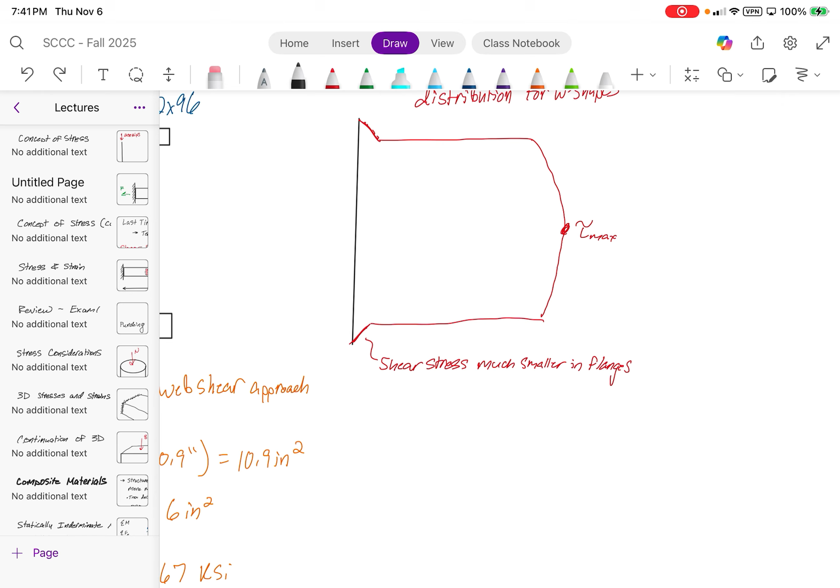So whenever you see a W shape, pay close attention to the wording of the problem, because if it asks for the maximum shear stress, it's asking for what the shear stress is at the neutral axis, which for those sections I will usually just give you something simple because I understand this can take a little bit of time to do. You'll see that more often for rectangular shapes. If I asked for the shear strength of a W shape, usually I will specify average web shear approach, otherwise just assume it for W shapes.

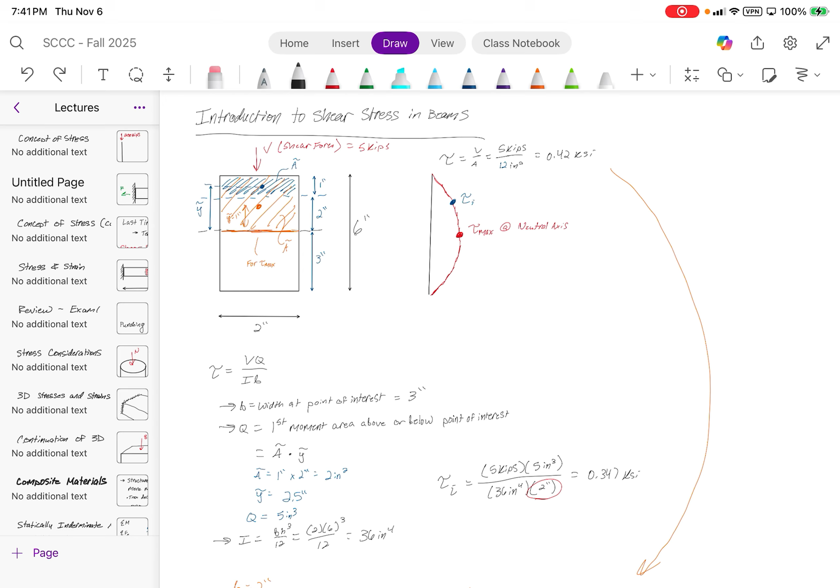All right, now one thing to note is actually for rectangles, what you'll find is that when you divide the max shear stress by the average shear stress, you actually get that the average shear stress, there's this relationship between them for rectangular cross sections.

So if you think about it, as long as you apply a factor of safety greater than 1.5, preferably like 2 or larger, you're good. You don't even really need to worry about the maximum shear stress. But then you got to spend more money. So it's a matter of really balancing out, going back and forth, trying to figure out what you're really trying to do.

Is there any questions about anything that we've covered so far? No? All right.

So instead, there is going to be one problem on your homework that you're probably not going to be able to do until probably like Tuesday. So I would say focus on every other problem except for that one explicitly, and we'll go over it on Tuesday. Not go over it, but like, I mean, it's going to be...

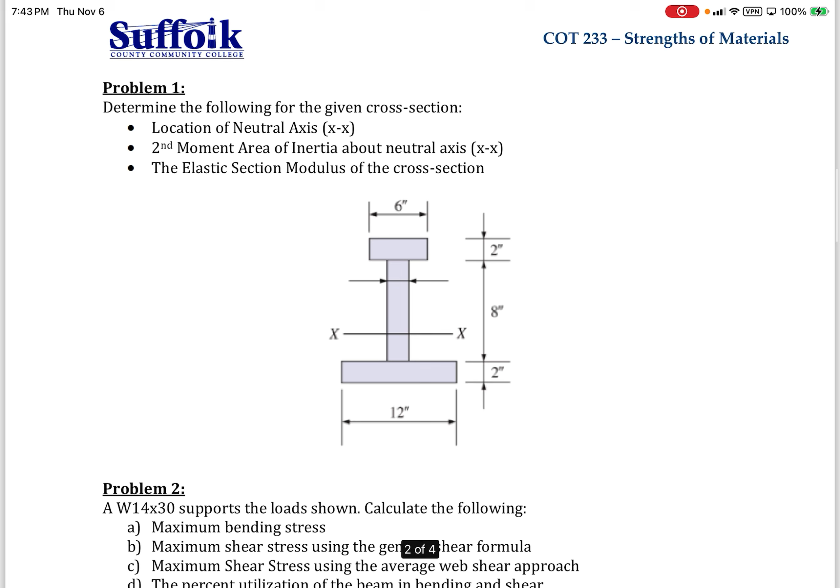Yeah, so this is like your homework 8. I'm just showing you guys now. The first problem is just a neutral axis problem and second moment of area of inertia problem. You guys, we covered this today.

Second problem is the maximum bending stress, maximum shear stress using the general shear formula. So what I mean by this is just use tau equals VQ over Ib.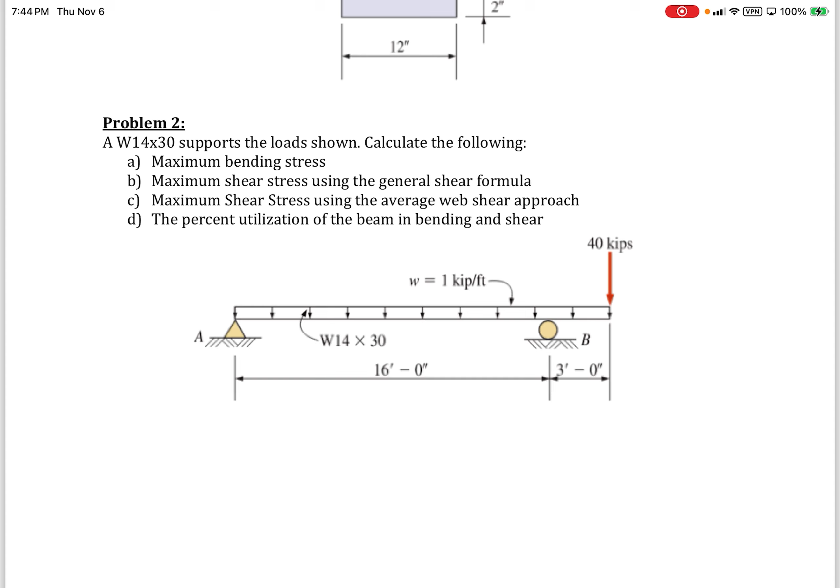No, I don't like the wording I did here. You know what, I might actually rework some of this. Yeah, just because the maximum shear stress using general shear formula, that's like using VQ over IB, which I might actually get rid of because I don't want you guys doing that for the W14, because that's going to be a very long problem. Yes?

We don't have class on Tuesday. There's no class on Tuesday? It's Veterans Day. Oh, interesting. All right, so then I will have to probably remove deflections off of my exam because I had no idea. I thought Veterans Day was a Monday, but I guess I am just losing my mind. Yeah, I just checked my calendar.

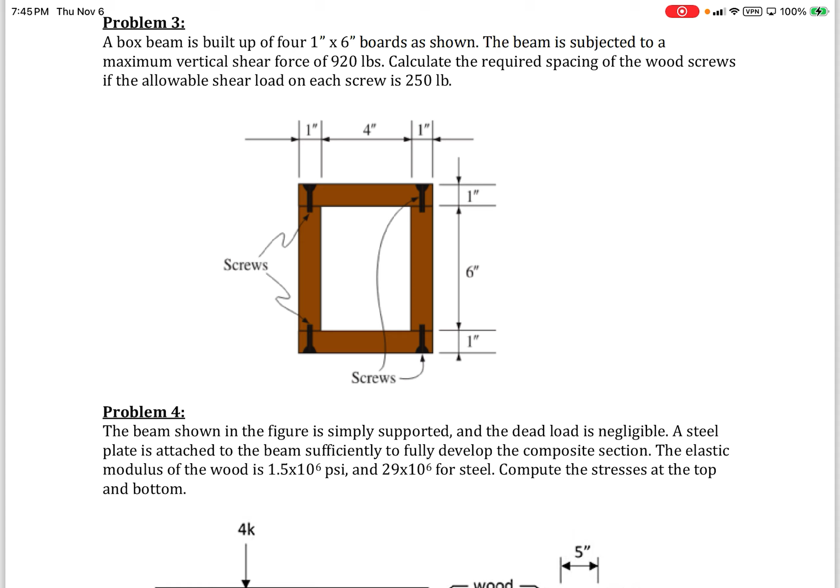Yeah, I'm actually going to probably rework this homework so that way, just to cover what we've kind of covered in class so far, just because I feel like I've been kind of rushing through the topics and the last thing I want to do is throw too many things at you guys. So what I want to do now is a full-fledged W-shaped design problem, including bending and shear, now that we know how to do the checks. So, yeah, I'm going to work on the homework.

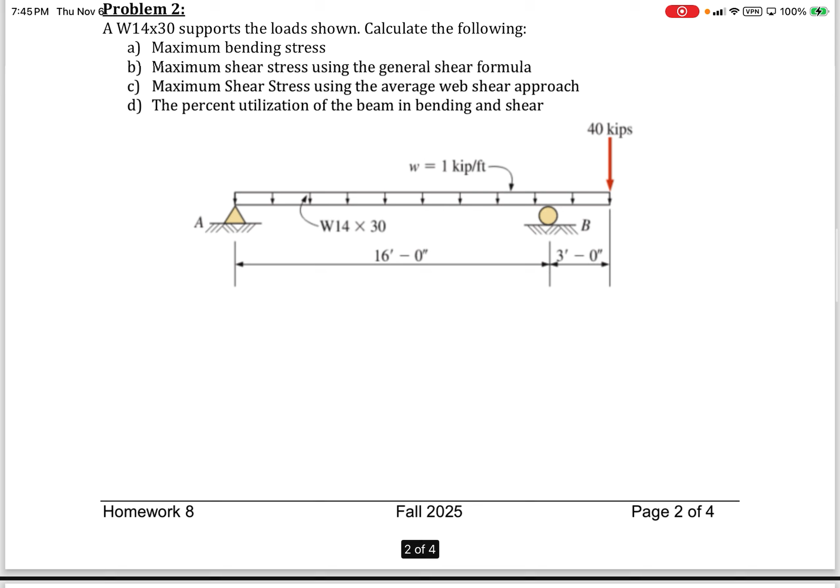So problem 4 is going to stay. Problem 5 is going to stay. And problem 1. Problem 2 and problem 3, I'm going to replace them because I didn't get to them and I don't want to rush. And with Veterans Day being on Tuesday, I'm not going to be able to probably get to them. I also don't want to put deflection on the exam because it's going to be annoying, so that's going to be on the last exam, covered probably after the Thanksgiving break. Everyone okay with that? All right.

So for this example, we have a W shape. And let's say it has a point load located here and located here. And it's loaded 1,000 pounds on both ends. This is 5 feet, 15 feet, and 5 feet.

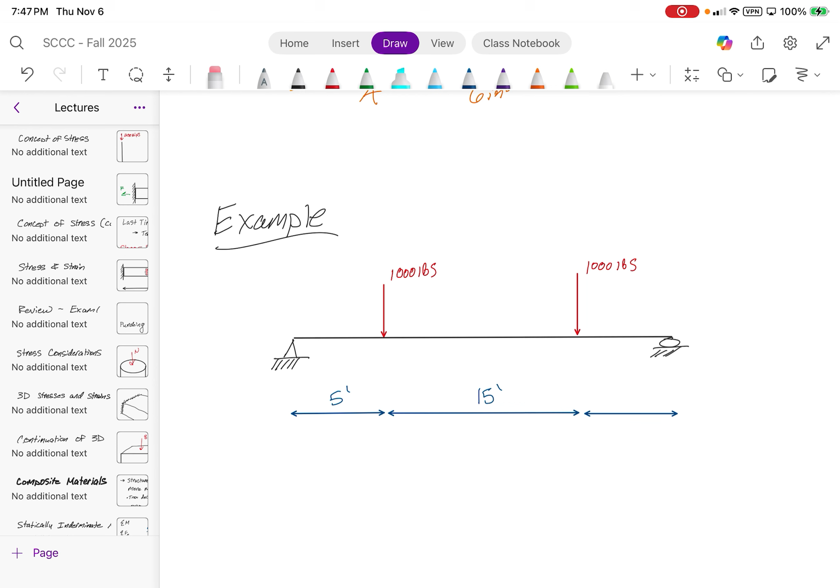All right, now we want to size out what the W shape is going to be. There are 2 ways we can determine our internal forces. First is just by drawing out the shear force and bending moment diagrams. You guys should hopefully know how to do that. Or you can use the tables because this is a simple load case. The load case that this would most match is figure 9.

So M max is just going to equal... oh wait, I forgot to specify, A992 W shape, and let's put a factor of safety equal to 2 on it. All right, so what is M max going to equal? It's going to equal the 1,000 pounds times 5 feet, so it's equal to 5,000 pound-feet. Does everyone see where we get that value? M max is equal to P times A.

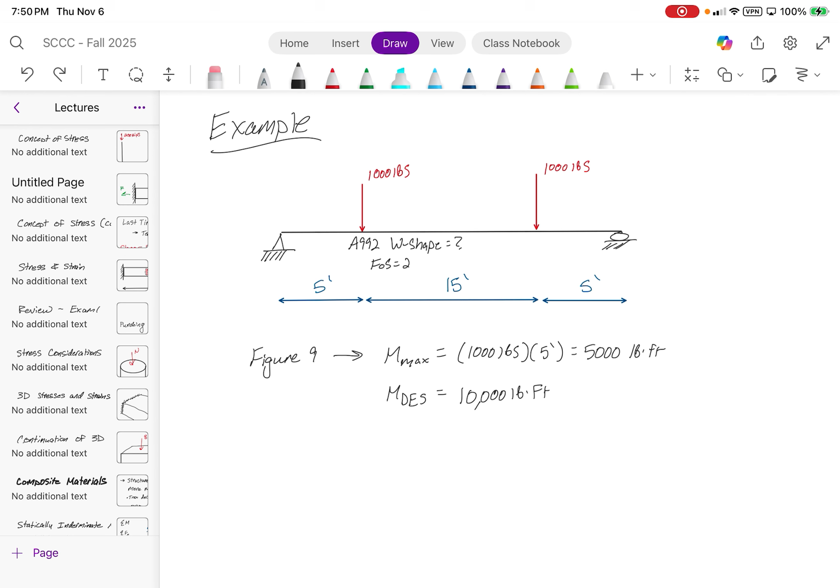So, with our design force of 10,000 pound-feet, you guys know how to determine the capacity in terms of flexure. Let's go ahead and do that really quickly. I'll give you guys a few minutes to figure out what the required W-shaped section modulus would need to be for it to be in flexure.

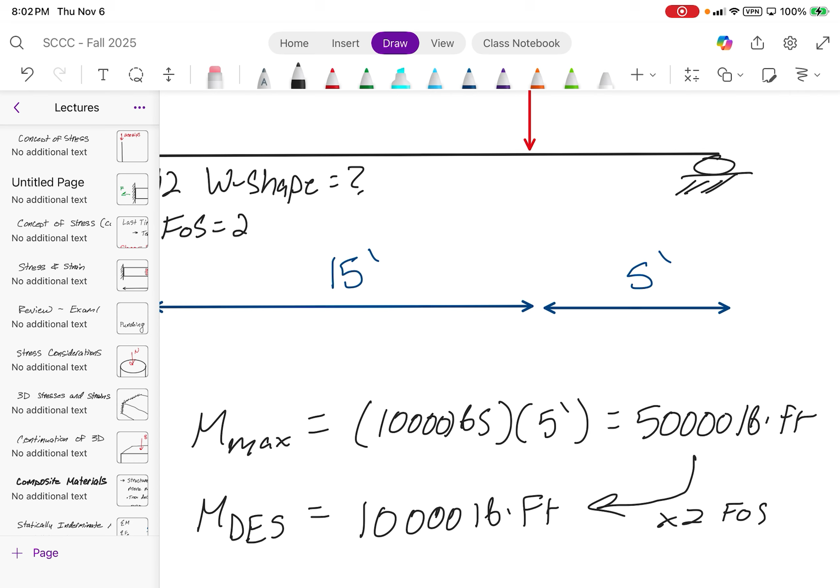Update this to be 10,000, and the reason for that is so that everything just gets an extra 0. So this becomes 10,000 pounds, which makes this 50,000 pound-feet. And then this becomes 100,000 pound-feet, which makes the numbers a little bit more realistic. So that would make sigma equal to M over I, or M over S.

Your required section modulus is just going to equal 100,000 times 12 inches per foot, divided by 50,000 psi. What do you guys get for a section modulus now? 24. 24 inches cubed? Is that what you get? All right.

See, I'm so glad I'm able to resolve problems without having to manipulate the problem entirely. When in doubt, just add an extra 0. That's what I've come to learn for problems. Or removing a 0. All right.

So, looking at this, what W shape would you guys recommend? W12 by 22? 12 by 22? Yeah. All right, let's work with a W12 by 22, which gives us a section modulus of around 25.4 inches cubed, which is greater than 24, with the factor of safety of 2.

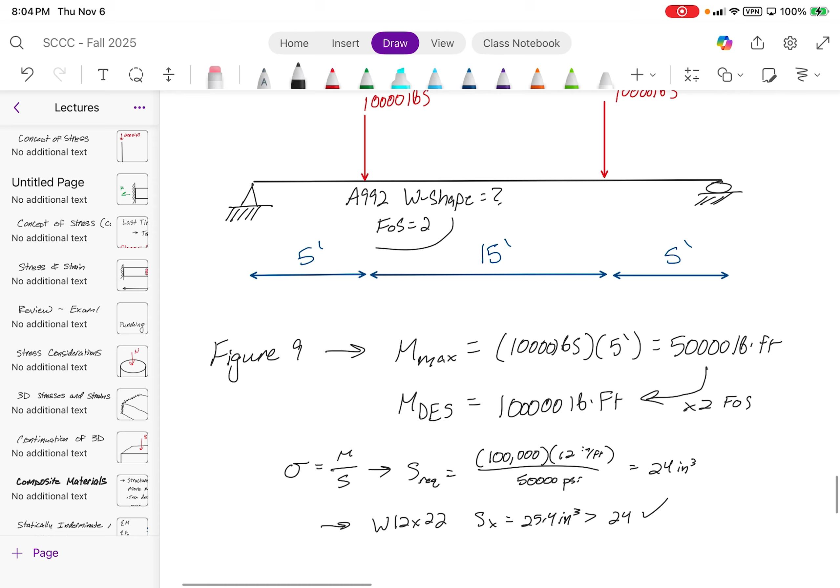The shear force is just going to be the 10,000 pounds, right? Which is going to equal the V from the table. But what's our design shear force? 2 times the shear V because of a factor of safety of 2. Same thing that we did here. So all your loads need to have a factor of safety associated with it, right? So our design shear force becomes 20,000 pounds.

All right, now using the average web shear approach for W shapes, basically doing the same thing that we did here, confirm if the beam is adequate in shear also. Take a few minutes to do that, and then we'll go over it.

I'm not going to give you guys a get out of jail today either, because I realize beams have been a little bit hectic, since I've been low-key trying to figure out what I want to teach and not what I want to teach while I've been going along. So I feel like you guys just having to deal with me this week has been punishment enough.

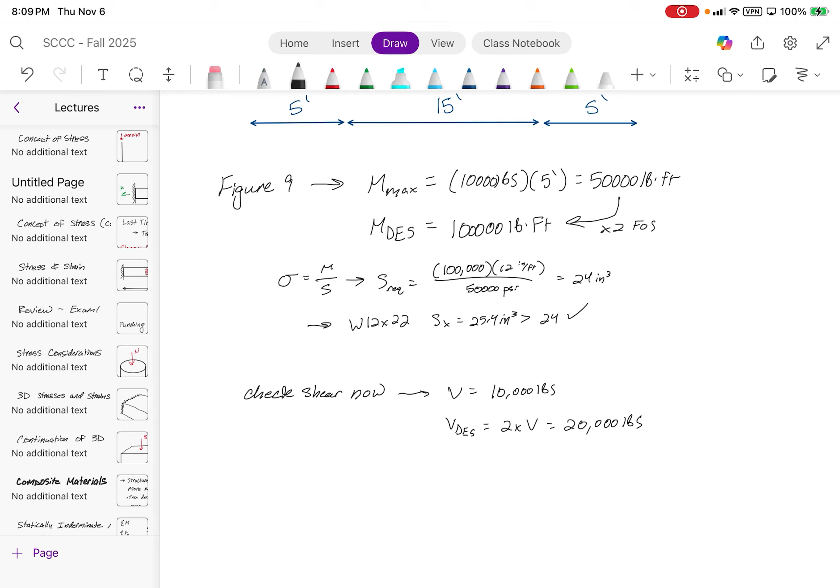Which it doesn't say on the table, actually, now that I'm thinking of it. But a good rule of thumb is the yield strength in shear, or, hold on, wrong symbol. It's frozen. Oh, it would help if I, yeah, sorry. I'm like trying to do like 4 things at once.

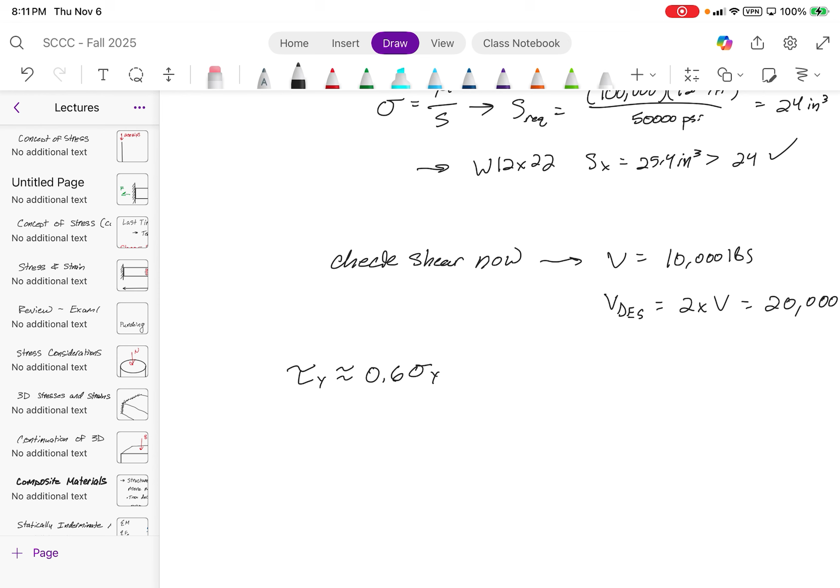So a good rule of thumb, since it doesn't specify on the table, but for steel explicitly, the shear strength is usually 60% of that. It's just a good rule of thumb, so you can kind of see the relationship on the table. 60% of 36 is 21.6, which they just round down to 21. So for tau y, if this is 0.6 times 50, then it's 30.

So, did you guys compute the shear stress yet in the beam using average web shear? You guys should have hopefully been able to do that.

Question over there? You think you got it? All right, how about anyone else? Anyone else get it? You too? What? Half? All right, so what we are using is a W12 by 22.

What is the shear area for the W12 by 22? It's the area of the web. So what you need to do is you need the depth of the web, which the depth of a W12 by 22 is 12.3 inches, minus 2 times the flange thickness, which is 0.425 inches. Which gives us a total shear depth of around 11.45 inches.

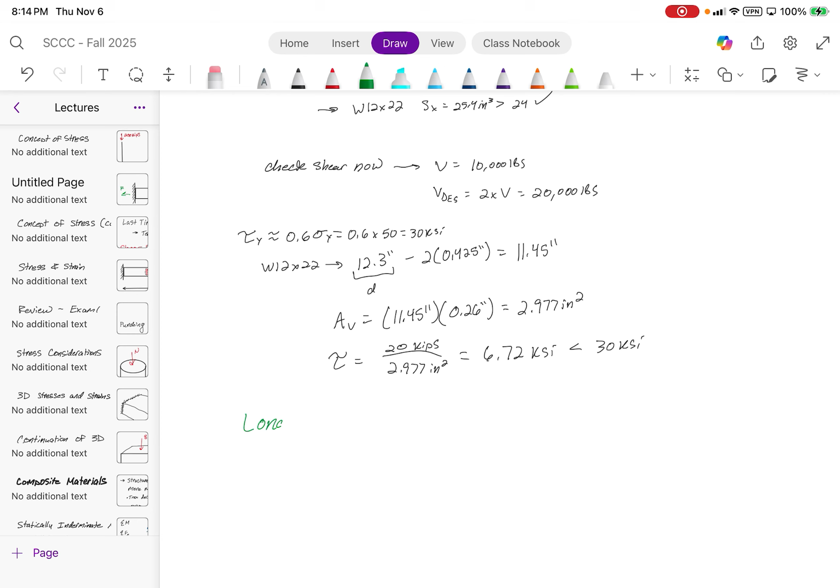So here's an important thing to note: when you have relatively long spans, bending usually governs. Which means that for most beam problems, figure out the flexural demand and size your beam based off of flexure, and then check shear. For shorter spans, usually shear governs. So rule of thumb is usually check bending first, because the beam usually needs to be a really small span in order for shear to govern. Otherwise, 90% of the time, bending is always going to govern.

So whenever you're designing a W shape, always look at how flexure is affected. All right, it is now 8:15. You all are free to go without a get out of jail.

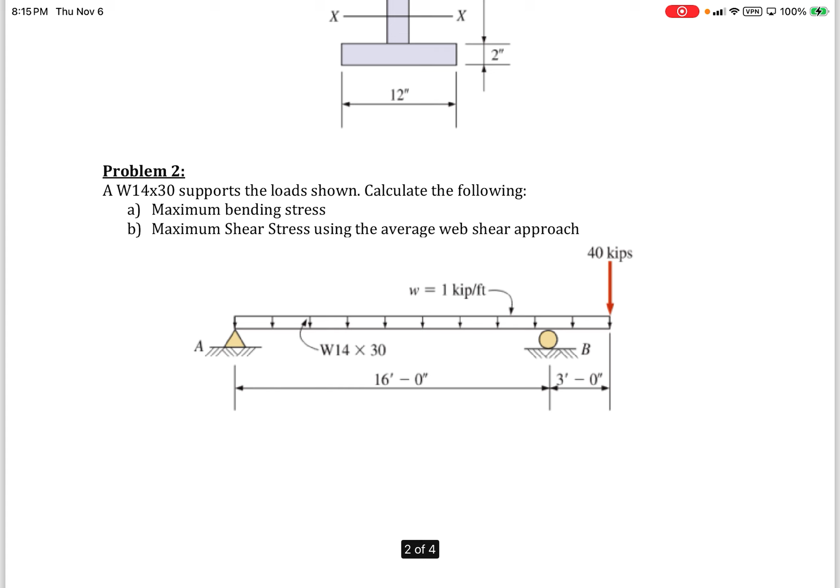And like I said, I changed that problem too. I removed one of the things, just maximum shear stress using the average web shear approach, and then just determining the maximum shear stress in the box shape. So this is using that VQ over IB stuff. All right, have a good night.